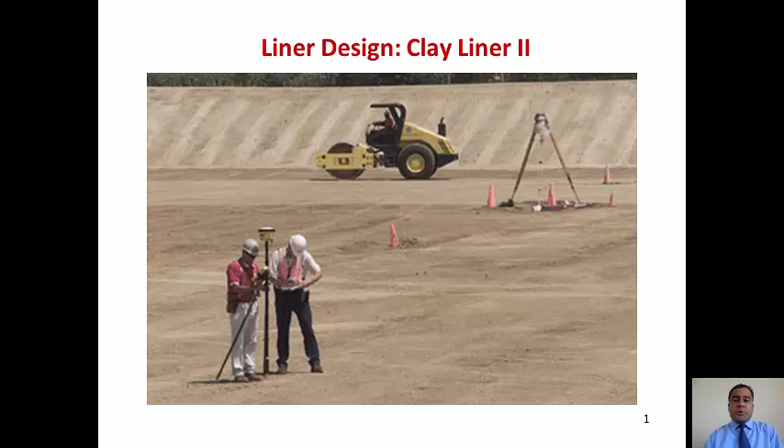Today we will finish the characteristics or properties of a clay liner. First we'll talk about the factors that affect hydraulic conductivity. Last week we talked about what hydraulic conductivity is, how to measure it, and what the requirements are for liners. Today we'll check what factors control hydraulic conductivity. We'll also talk about measurement of hydraulic conductivity in lab and in field, and in the third quarter we'll talk about compaction characteristics.

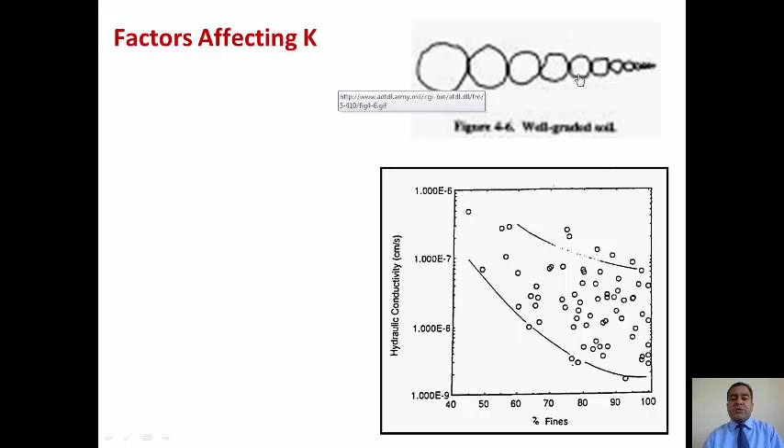Let's begin with the factors that affect hydraulic conductivity. Mostly soil is called well graded if it has different size particles in it. We measure that based on the coefficient of uniformity and coefficient of curvature that we dealt with before. The hydraulic conductivity is less if we have more fine-grained particles in it, and that's obvious because if we have coarse-grained particles, the voids created by those coarse-grained particles are pretty big. If we have fine-grained soil, it will go inside those voids to increase density and reduce the pore space, and that reduces the hydraulic conductivity.

Here's an example. The hydraulic conductivity that we need is 10 to the power negative 7 centimeter per second, that we repeatedly talked about, and these are the data they got. You can see the trend: higher the percentage of fine, that is percentage of silt and clay, percentage of soil finer than number 200 sieve or 75 micrometers, the lower the hydraulic conductivity. If the percentage of fine is more than 95%, it gets almost constant. But with increase in percentage of fine, hydraulic conductivity decreases, even showing almost a two-order decrease.

As I mentioned, well-graded soil definitely has lower hydraulic conductivity if other parameters are the same. When we add fines, that reduces hydraulic conductivity by several orders. For example, by changing the percentage of fine from 50% to 95%, or 90%, it reduced hydraulic conductivity by almost 2 log cycles. The reason I brought this up is sometimes in the field you have soil you don't want to throw away. If you separate the soils based on gradation or particle size, and then calculate the amount of fine required to make 20%, 50%, 60%, or 70% fine depending on what's needed, and add that fine—sand plus silt, clay plus silt—that helps reduce the hydraulic conductivity.

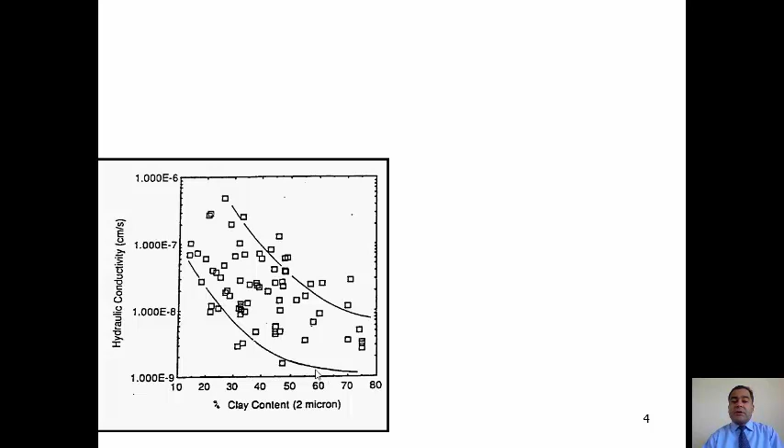Most of the time, what happens is the soil we get in the field doesn't qualify for a compacted clay liner, because we have enough sand in it but not enough clay, and that causes a significantly high hydraulic conductivity value. So what we do is purchase commercially sold clay, highly expansive clay—we talked about bentonite before, when we discussed clay minerals.

So bentonite is a type of commercially available soil that we can buy in the market at a relatively cheap price, but it has a significant high percentage of montmorillonite, sometimes over 90%. The sodium bentonite I have in the lab has more than 90% montmorillonite in it. So bentonite is a soil, a highly expansive soil, with a significant amount of montmorillonite.

Okay, now you see the trend here. For silt and clay, that's fine, we're talking about 50% to 90%. For clay to get the same reduction in hydraulic conductivity from 10 to the power negative 7 to 10 to the power negative 9, you need less than 60% clay in it. But for our purpose, less than 10 to the power negative 7 centimeter per second, if you're going with the lower bound, you need about 15% clay. Upper bound, you need about 45% clay.

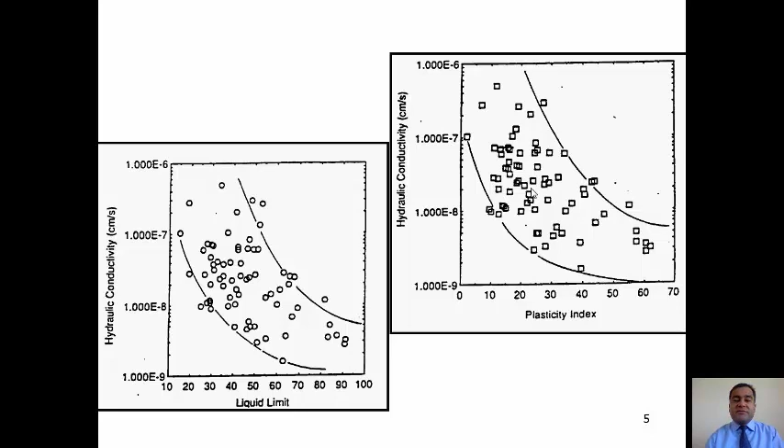So the important fact for us is to get the required hydraulic conductivity. If you see the example here, the hydraulic conductivity can be achieved at a plasticity index ranging from 5 to 32 or 33. So that is the range. But this is just one statistical dataset that someone published, there are tons of data we need to go through to make the guideline.

For that reason, whenever you see a guideline, it is always conservative, and you will see what the required plasticity index will be. For example, if I simply say the required plasticity index of the soil is 10%, if it is smectitic soil, it will give a hydraulic conductivity lower than 10 to the -7 centimeter per second. But if the soil is dominated by kaolinitic or silty particles, then 10% does not give enough reduction in hydraulic conductivity, that is, 10 to -7 centimeter per second. That is the logic behind the requirement we fix for the plasticity index, plastic limit, or type of soil for compacted clay liner.

Mostly, as I'm repeating, we're focused on a required hydraulic conductivity of 10 to the -7 because we are concerned about the movement of leachate more than anything else. We need clay because clay has lower hydraulic conductivity that reduces the movement of leachate. So if we talk about plasticity index, mostly if it is more than 7 to 10%, typically we can get the low hydraulic conductivity, as shown before.

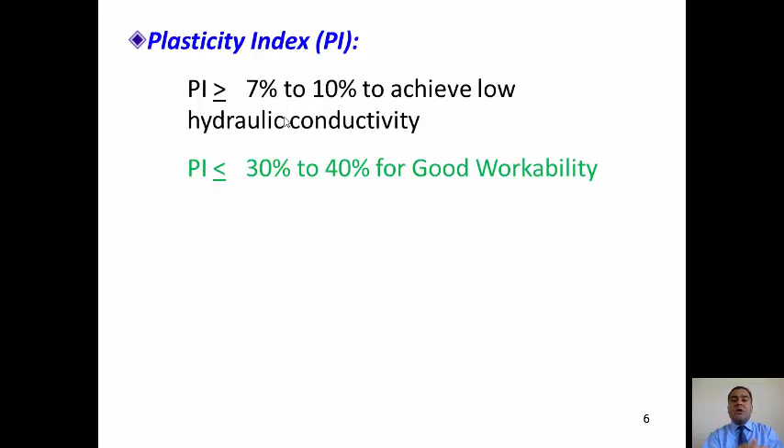So we even prefer that. The problem is, if you have highly plastic soil, then when we compact it in the field, because it's highly plastic, you don't get a fully saturated condition, because we also control the moisture content when we compact. If the soil is highly plastic, the water we add may create clots of particles, so there may be segregation, some clots of particles with a lot of water while other particles remain dry, and when we compact them, the compaction effort may not be uniform.

So one clot of soil we compact may have the required hydraulic conductivity, but the other part that isn't clotted, with less water, may give much higher hydraulic conductivity than the part with enough water. For that reason, it's important to limit the plasticity index also, to reduce clot formation during compaction and heterogeneity in the hydraulic conductivity of the compacted soil specimen. For that reason, we don't want to go much higher in plasticity index, although in a lab situation that may be desirable for lower hydraulic conductivity.

Keep this in mind, this is extremely important - it limits the upper limit of plasticity index for soil used as compacted clay liner. There are ways to deal with that: if we increase the compaction energy or compaction effort, that will break the clots and give more homogeneous hydraulic conductivity, but that is not cost effective.

Good soil liners can be built from soils with very high plasticity index, although construction is more difficult because we need more energy to break the clods. The main reason is that soil with high plasticity index or liquid limit has the disadvantage of high shrinking and swelling, which may cause desiccation cracking.

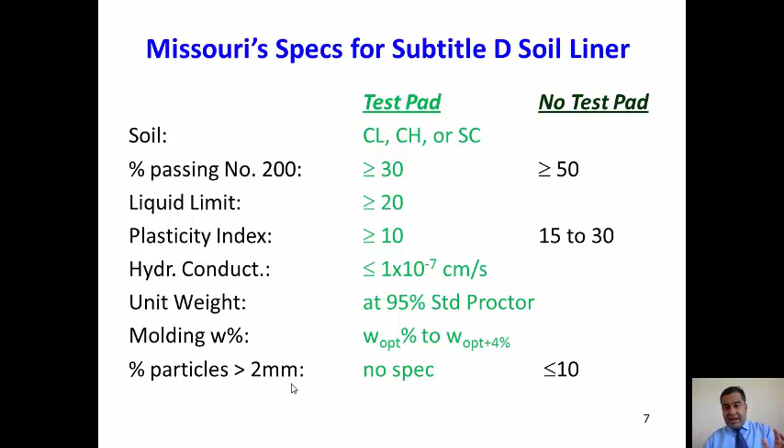So this is the specification for Missouri. It could be different for California. It could be different for different parts of the world.

The other characteristic that controls hydraulic conductivity is the freeze-thaw environment. It is extremely important and plays a huge role in major parts of the U.S. where we have frost depth. For Southern California, for Los Angeles, we don't have frost depth. But if you go to the northern part of the country, like North Dakota or Wyoming, the annual freeze-thaw zone, the depth of the annual freezing zone, is pretty large, sometimes even higher than 5 feet.

So that's the freeze and thaw cycle. In winter, the ground freezes. In summer, the frozen soil melts and thaws, and that will cause a big problem. That freezing and thawing cycle may cause more than 3 orders of magnitude increase in hydraulic conductivity. The main reason is when soil freezes, the volume of the water increases. That way, the void space filled with ice increases because the water becomes ice. So the void space filled with ice, that volume of void space increases. And then when it thaws, it becomes water. For that reason, with different numbers of cycles, the actual volume of the void keeps on increasing.

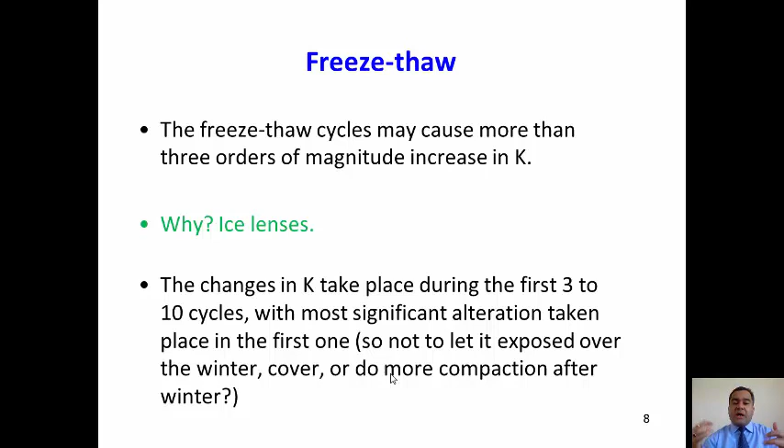So what we do is cover them, and we do more compaction right after the first winter. We know freezing and thawing cannot be controlled, but as soon as one cycle of freezing and thawing is done, we compact again. That way, even though the void space is increasing, compacting reduces the void space, and that way we maintain the hydraulic conductivity. That is one remediation in those areas.

So we talked about compaction. When we compact soil, we take soil in the real field and compact it with compaction devices, or you can take soil in a container, like a steel container, pour the soil in and drop a hammer to compact them. The compaction effort increases. What is the objective of compaction? To increase the density of the soil mostly.

If we add water, that water will help move the particles inside, fill in the voids, reduce the void space, and increase the density. The more water we add, that will lubricate the soil and help it move closer together, which helps increase the density.

But if the amount of water is more than a certain amount needed for that lubricating effect, then adding more water may end up filling the void space, and when we compact, the water may repel the inertia back. Also, water is incompressible, so it takes up void space that has potential to be compacted. Since water is less dense than soil, with the void space taken by water, that starts reducing the density of the soil.

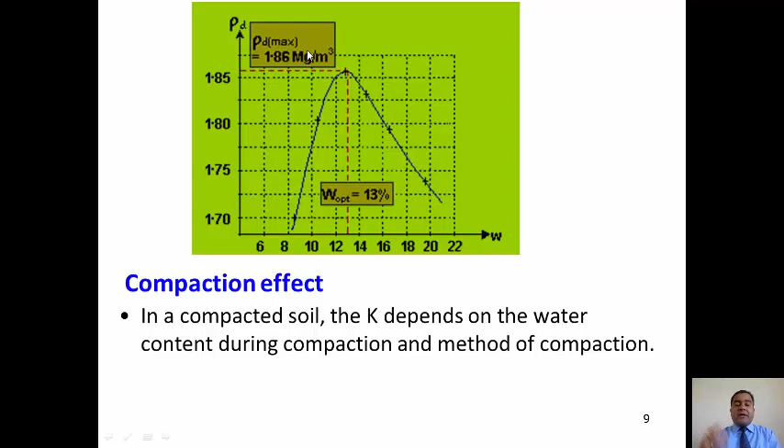Depending on if you increase the amount of inertia, even with less moisture content you can increase the dry density or dry unit weight of the soil - we'll talk about that in a couple of slides. The important thing for us is to know the moisture content that corresponds to the maximum possible dry density for that particular soil and compaction effort.

That corresponding moisture content is called optimum moisture content - the moisture content that gives us maximum dry density or maximum dry unit weight. This figure is the same one I showed you before: higher the molding moisture content, higher the dry unit weight or dry density of the soil. The broken line shows the moisture content that corresponds to maximum dry density, which is optimum moisture content.

Now looking at the hydraulic conductivity of the soil at that moisture content - if you increase the moisture content higher, the pore space fills with water, and even though the density is a little low, hydraulic conductivity decreases. Hydraulic conductivity becomes almost constant at a moisture content somewhat higher than the optimum moisture content. So increasing the moisture content beyond that does not further reduce the hydraulic conductivity.

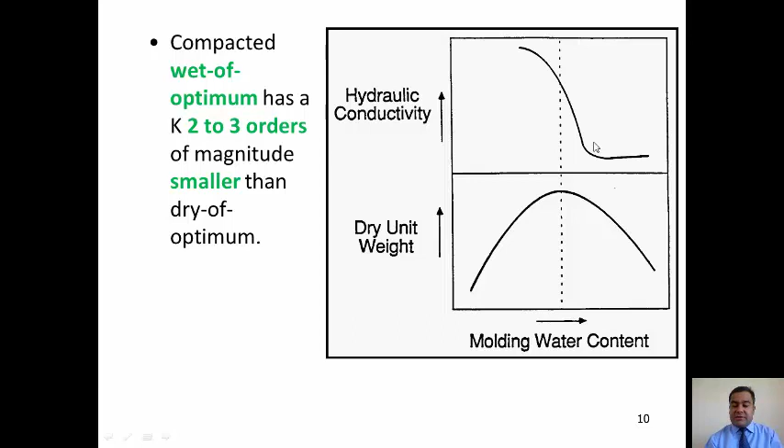So we have to keep that in mind. For that reason, when we make this specification, we always say the field moisture content used to compact the clay liner should be more than the optimum moisture content, or should be on the wetter side of the optimum moisture content, but we don't want to go beyond a certain moisture content. That does not help us in reducing the hydraulic conductivity. We have to keep that in mind.

So the other factor that controls the hydraulic conductivity is how we compact the soil. The clays can be compacted in two ways. One is we lay the soil, let's say a 6-inch thick lift of soil, and then we roll it with a smooth wheel roller or some static compaction on top. That's one way we compact the soil.

The other way to compact the soil is kneading. Static compaction simply puts pressure on top and lets that pressure cause a reduction in volume to increase density. The other is kneading action. When you're adding water to clays, more kneading you do, the more distribution of water you get at one point.

At the same time, if you have a device with that kneading action, it is mixing the soil, compacting at this point and at that point simultaneously. That is called kneading action. You need a projection for that. That way you apply similar pressure at the bottom and at the top. But with static pressure, you have more pressure at the top and less at the bottom. So kneading action makes sure the soil is uniformly compacted in all areas.

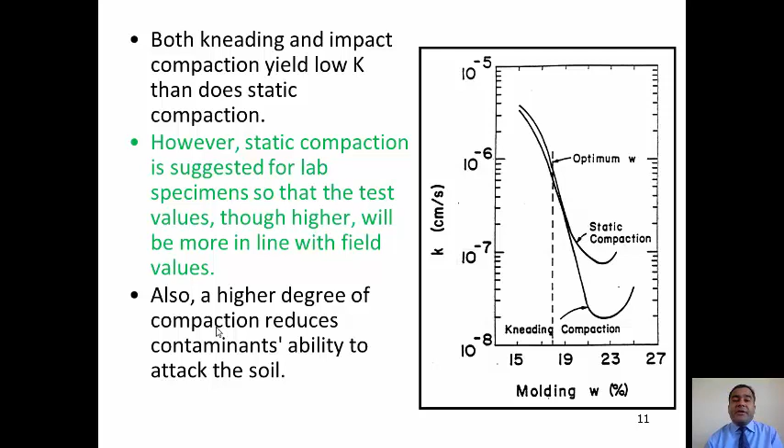That reduces the possible change in property of the soil due to contamination, due to the chemical attack on the minerals in the compacted clay liner. So this is important - one thing to keep in mind is hydraulic conductivity.

Compacted clay liners are actually not fully saturated. When we operate them in the field, they are not fully saturated. They are compacted, meaning degree of saturation is less than 100%. We'll talk about that - that means you have air void and water void.

The conductivity of water is called hydraulic conductivity. Conductivity of air is not called hydraulic conductivity - it's called the coefficient of permeability of air, or coefficient of air permeability.

If we put the soil sample in the lab, saturate it, and measure the hydraulic conductivity, that is called hydraulic conductivity for saturated phase. If the degree of saturation is 100%, the hydraulic conductivity divided by KRA or KRW, relative hydraulic conductivity, that is hydraulic conductivity of the soil divided by hydraulic conductivity of the saturated soil. Since it's completely saturated, that ratio will be 1, because mostly when we run the hydraulic conductivity test, we saturate the sample and measure the hydraulic conductivity of the saturated soil specimen.

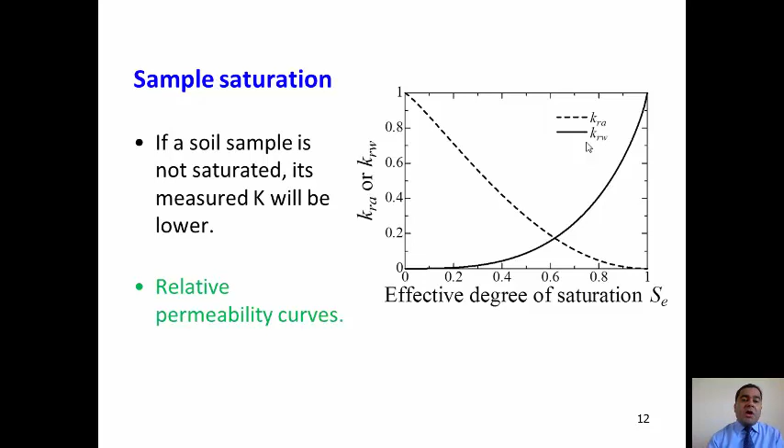And then we always check that in the relative permeability curve like that. We check the ratio between the hydraulic conductivity of the soil. Rw is hydraulic conductivity, Ra is the air conductivity, air permeability. So we always need to use this type of chart for different types of soil.

The other thing controlling the hydraulic conductivity of the soil is the hydraulic gradient itself. What we saw was EPA requires the height of the leachate in the landfill to be less than 1 foot, which we talk about frequently. Let's say the thickness of the clay liner is 1 foot, and the height of the leachate is 1 foot.

That gives us the hydraulic gradient equal to head difference divided by the length it traveled. If the head difference is pretty high, the hydraulic gradient will be high. If the thickness of the liner is 1 foot and the height of the leachate is 1 foot, then using the equation H plus D over D, that's total 2 foot over 1 foot, so the hydraulic gradient is 2.

Let's say you have a liner 3 feet thick, and the leachate is 0.5 foot tall. Then it will be 3.5 over 3, which is much closer to 1. So we always try to reduce the hydraulic gradient and put it closer to 1.

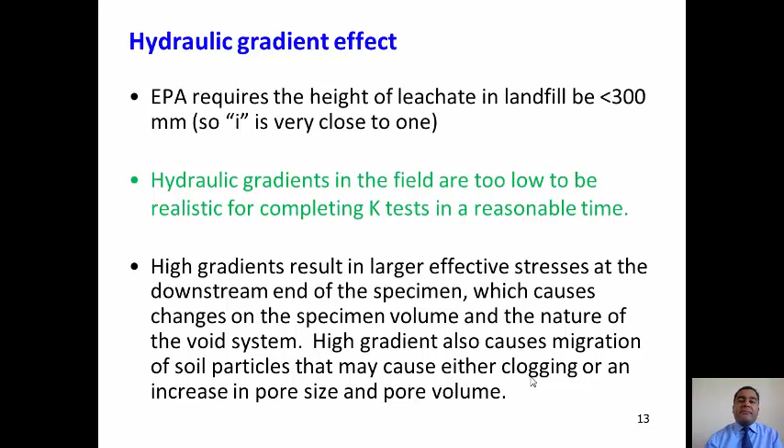If that suspended particle is flushed out, then the pore space increases. That's important to note, and that will increase the void ratio of the soil. And consolidation stress is the pressure we are giving to the soil.

At some point, when the compacted clay liner is completely saturated—first we put the compacted clay liner, and then at one point you have a huge amount of leachate on top of it—a portion of the compacted clay liner might be completely saturated. As we keep putting garbage on top of that, we are increasing pressure on top of it, and that increase in pressure will squeeze and compress the soil.

Then the water gets pressurized, and that pressurized water starts leaking out, so the water drains out. That phenomenon is called consolidation. Water drains out and that reduces the volume of void, reducing the void ratio. The phenomenon of draining pressurized water or fluid out from the void space to reduce the void ratio and the volume of the soil is called consolidation.

So higher the consolidation, how do you get consolidation stress? The more garbage you put in, the more it keeps increasing the consolidation stress, which is the pressure pushing on the compacted clay liner. Higher the consolidation stress, lower the K, because that reduces the void ratio and increases the density.

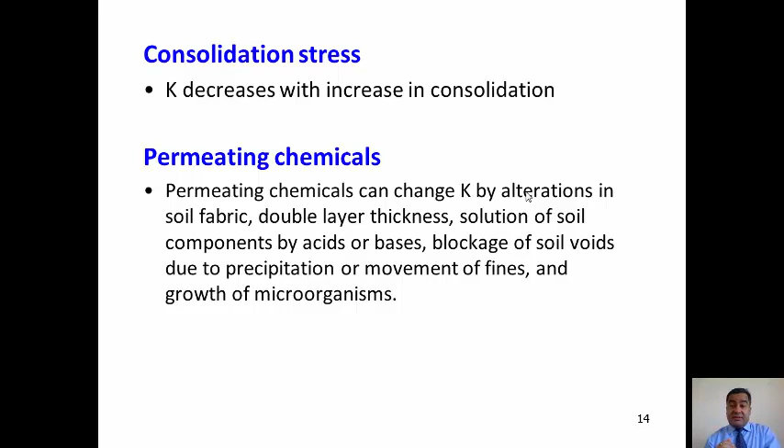But if that thickness decreases, then the attraction between one plate and the other increases. That means there is a possibility that one soil plate will merge with the other pretty easily, because they have a huge attractive force, and that way the particle shape changes. Once the particle shape and fabric change, that will change the hydraulic conductivity.

So we have to be very careful. We have to think about what type of chemical we are getting from the leachate, and what will be the reaction of those chemicals — if you have acids or bases — with the soil we are using for the compacted clay liner.

Sometimes what happens is some chemicals just produce precipitation. Like if you have lime or calcium, that can produce calcite precipitation. Once you have calcite precipitation, that becomes solid and takes up the pore space, blocking the void space, and that will block the movement of fines.

The other possibility is movement of fines and movement of water, and sometimes in the long run, depending on what type of chemical and biological characteristics you have in that soil, there is a possibility that you may develop microorganisms. If a microorganism develops, it takes the space of the void, so void ratio reduces. But if that microorganism dies off or something, the void ratio returns to the original or even becomes bigger. We have to keep all those things in mind.

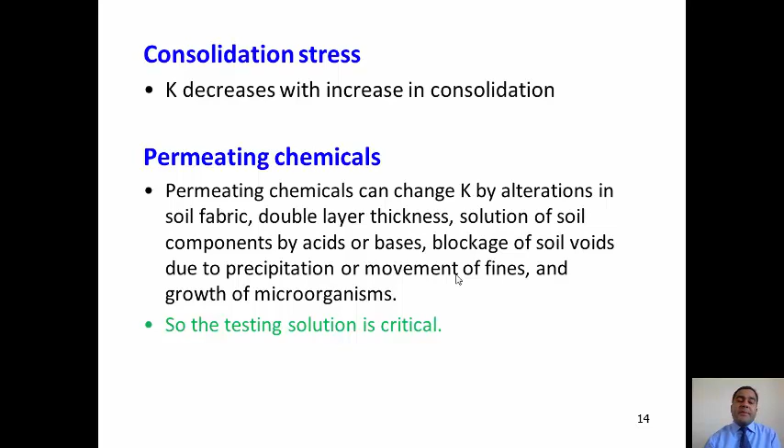So it's always important for us to run all these tests, even in the lab, using potentially contaminated water — mostly artificially prepared contaminated water. We'll talk about that in a couple of weeks, how we prepare that type of soil solution. But it's always good to test the water with different chemical components and see how those components change the hydraulic conductivity of the soil we'll be using.

The important variables we need to consider in testing hydraulic conductivity in the lab are as follows. You have to make sure that the lab sample may not be the same as the field sample, so we have to make the lab sample as close as possible to the field sample.

Field compaction is done by the sheep's foot roller, or it could be done by the smooth foot roller, any type of roller. Lab compaction may be done using static pressure, or by dropping the Proctor hammer. We have to keep all these things in mind when we set up the lab environment, so we always try to make the lab sample as close as possible to the field sample.

Degree of water saturation is extremely important. We talked about that - higher the degree of saturation, higher the hydraulic conductivity. For that reason, to be on the safer side, if you run all tests at 100% degree of saturation, that'll give you the maximum possible hydraulic conductivity, and we are on the better, more conservative side of the design.

Stress condition - we have to keep that in mind. What is the stress we are putting on the sample to simulate the field situation? Because the effective stress in the field ranges from day one to the end of closing. Effective stress ranges significantly from the starting to the end of the landfill site or the cell.

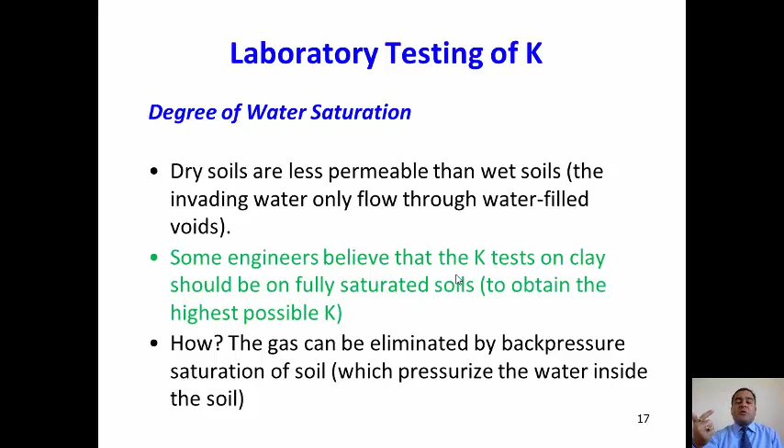Okay, so if you see the effect of confining pressure on the hydraulic conductivity, we're talking about clay. When clays are dry they shrink, and when they are wet they expand. So when they have that expansion and shrinkage behavior, negative pressure develops, and the clays crack.

Whenever you have some pulling effect, when it is shrinking, then one part of the soil is pulling against the other. So when they are trying to separate from each other, tension is created. That tension, or suction, the soil cannot take, so the soil cracks immediately after it develops tension.

When you have that tension much below the ground, the tension is balanced by the effective vertical stress from the total vertical stress, so you don't get negative effective stress. But on the surface of the soil, there isn't much surface load, so the soil cracks. These types of cracks are called desiccation cracking.

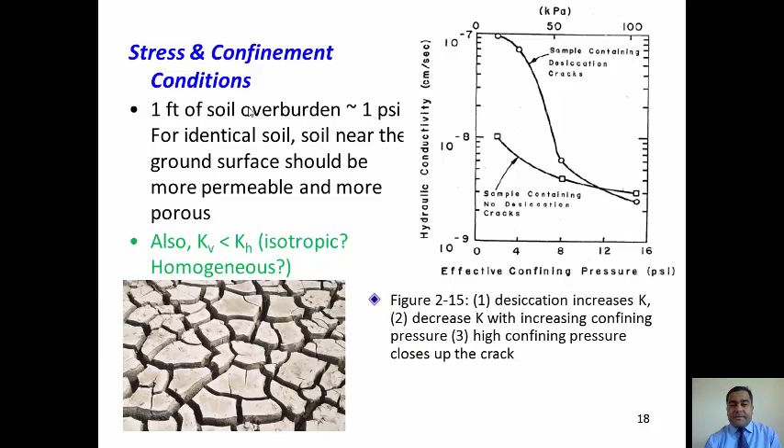All these factors we have to keep in mind when we design the landfill site. For that reason, the confining stress used in the lab test should be of the same magnitude as that in the field, because the magnitude of confining stress changes with overburden pressure, and overburden pressure changes with time. So rather than fixing on one value, we may want to see the ranges.

For example, oil reservoir cores are much further below the ground. When you take them out, overburden pressure was thousands of psi when they were under the ground. When you take them out now, there's no overburden pressure, so the soil expands. These are important things to keep in mind when we design lab tests and even when we design landfill sites.

The bottom of the liner will always receive additional compaction from the waste and final cover, as we talked before. On the other hand, none of these things exist for the top cover. So the bottom gets more confining pressure, more overburden pressure compared to the cover. The liner gets more overburden pressure than the cover, because the only thing you get on top of the cover is topsoil.

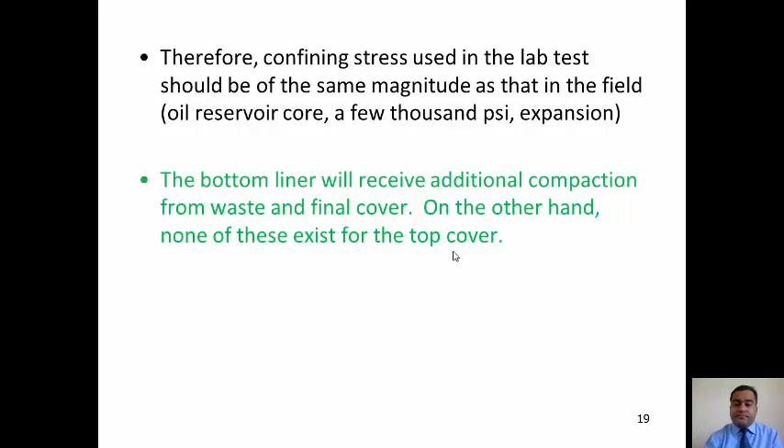In addition, the cover is the top layer - after you're done with your landfill, you cover that with a layer called the cap or cover. So the cover is subjected to many environmental forces. Now you have erosion coming - if you have huge rainfall, that may cause erosion. In dry conditions, you have more desiccation cracking problems in the cover compared to the liner, because mostly the top portion of the liner is filled with leachate anyway, so it's getting saturated with leachate. But with the cover, depending on the wet season it gets a little wetter, but mostly temperature changes cause desiccation cracking on the cover.

So it is extremely hard to design and implement a final cover with a hydraulic conductivity lower than that of the bottom liner, because in reality you may come up with that, but in practice, all those environmental consequences may cause an increase in hydraulic conductivity in the long run.

So how do we run the hydraulic conductivity test? We just compact the soil in a mold, called a rigid wall permeameter or container. We compact the soil inside at a certain pressure, we lock them, and then we flow water. If you have time, come to my lab and see - I have different types of permeameters you can see. Mostly we use this one.

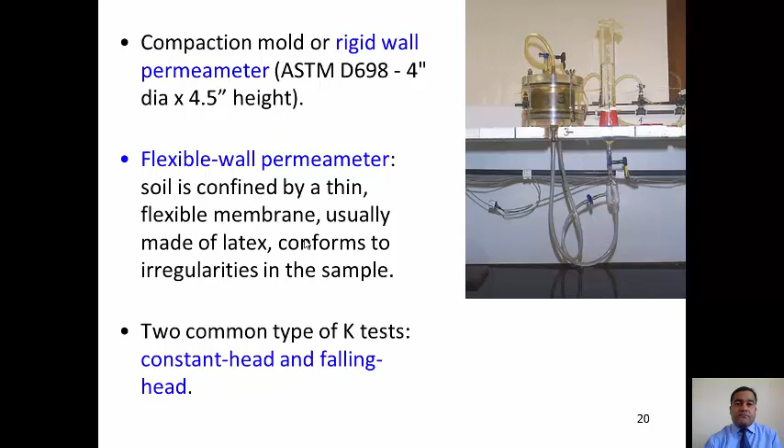We also do field testing, which is much better than lab testing because it gives you the field situation, but it is much more expensive. Field hydraulic conductivity measurement is more realistic than the lab test because the mass of soil is huge, and the phenomena is two-dimensional or even three-dimensional compared to one-dimensional in the lab.

One type of field testing is the borehole test. What we do is drill a hole, fill the hole with water, and measure the rate, because once you fill it with water, the water keeps on percolating down into the ground. So we keep on filling that hole.

The amount of water required to fill the hole divided by the time period gives you the discharge, and based on that discharge, we can easily calculate the hydraulic conductivity of the soil. That's one way we measure field hydraulic conductivity in the borehole test.

The other method is porous probes. These are similar, but what we do is take the probes, which are like a cylinder filled mostly with porous stones, porous materials made of porous stones. We insert them, connect them with a tube, and supply water through the tube.

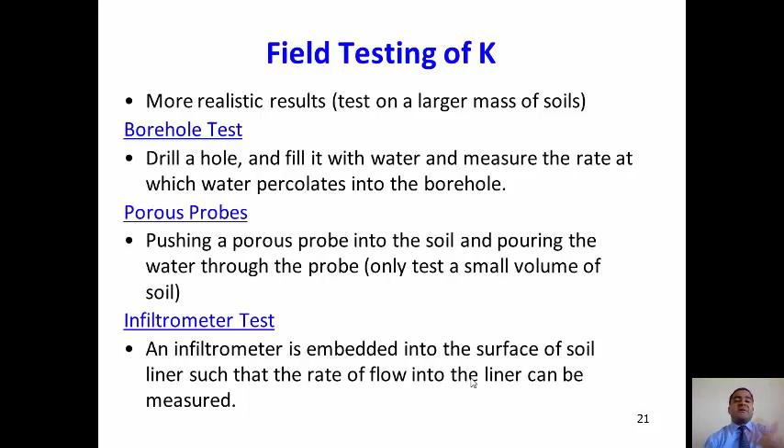These types of devices are called infiltrometers, and there are different types: double ring, single ring, sealed. We'll talk about that. Let's say this is a liner, the hatched one is a liner.

In the open single ring type of infiltrometer, what we do is fill the liner up to a certain point with water, and then measure the head going down, the height of the water going down. Using the Darcy's equation formula we saw before, you can easily estimate the hydraulic conductivity of this liner system. The problem with this is it's so big that the water evaporates.

You have no idea whether the reduction in the height of the water's surface here is due to evaporation or due to percolation. So to reduce that evaporation effect, what we do is we seal them - single liner, but sealed. And if sealing, you bury it underwater a little bit, but mostly what we do is make this tube from where we're supplying water smaller. That way evaporation becomes less, and at the same time sensitivity of the amount of water going inside increases.

So these are single ring liners, but in the field, double ring liners are more popular. What we do is put a bigger liner, large size infiltrometer, in the container first, and then put a smaller size one inside that. The bigger one could be rectangular or square, the smaller one could be rectangular, but mostly we prefer the circular one - we put circular inside, then pour water inside.

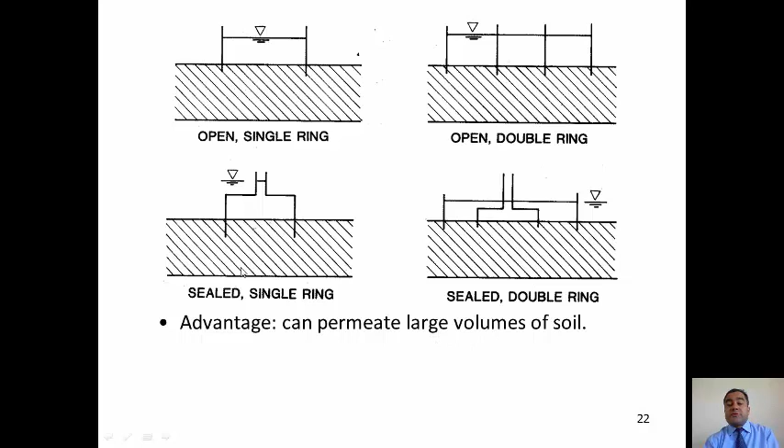The advantage of these infiltrometers is they can permeate a large volume of soil, because we're putting that in the soil directly. There are two forms: one is open, the other is sealed. These two are like sealed ones - we're sealing the majority portion. Still, we have to keep it open like a piezometer, just to maintain atmospheric pressure. The open rings are less desirable, mostly because of the evaporation.

For example, if the hydraulic conductivity is 10 to the -7 centimeters per second, it's hard to separate a drop of 0.002 inches per day from evaporation. If you're getting any evaporation, how do you separate whether the drop in water level was from percolation or infiltration, or from evaporation? For that reason, sealed liners are always preferable.

So you want to see the picture of that - it's like that. We maintain the flow of water here, you see - we fill outside with water, we fill inside with water. We have two ways: either we measure the volume of water going in to maintain the same head, or sometimes we simply measure the height of the water inside. These are the sealed ones.

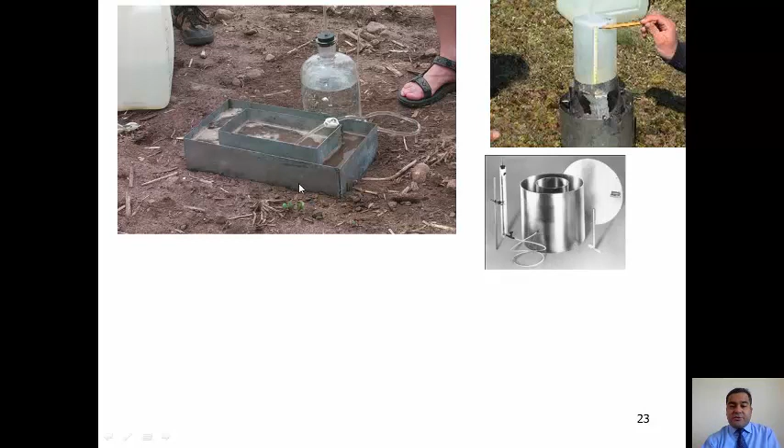And these are the double liner types - you have outside circular double liner, you have rectangular double liner type infiltrometers. So, single ring or double ring: single ring is less favorable because it allows lateral flow beneath the ring, as I told you before, and it's susceptible to temperature variation.

But with a double ring, the one inside is less susceptible to temperature variation because the outer ring is protecting it. Sealed double rings, because of all these advantages, are the most successful and preferable, although they are more expensive - I'd say the most expensive. The common size is a 12 foot by 12 foot outer ring, and 5 foot diameter inner ring.

So this is a schematic of the infiltrometers. Like you have soil, this is the soil, and we put bentonite grout just to make sure the flow is vertical down, one-dimensional. On top of that we put loose sand in it. So this is the wetting front of the liner, from where we're supplying water in.

So water keeps on percolating down from the liner, right? As it moves down, the wetting front means the separation between the saturated and the unsaturated zone. In other words, the wetting front is the front of the seepage water. Okay, that's the wetting front.

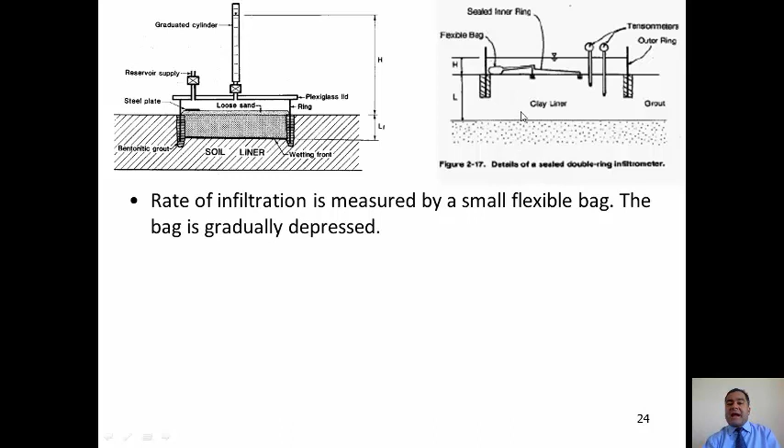So the rate of infiltration in these types of infiltrometers is measured by a small flexible bag like that. The bag is gradually depressed in the liner as the water moves down, and the outer ring forces the infiltration from the inner ring to be more or less one-dimensional, because that's the objective of the outer ring. And covering the inner ring with water mostly insulates it substantially from temperature change. Okay, so this is the objective.

So, we talked about that. And the bag you have in this double ring infiltrometer, or sealed infiltrometer, serves to stabilize the pressure between the inner and the outer rings. Otherwise there will be flow. If there is a pressure difference between inner and outer, there is a possibility that flow from the outer will go into the inner, or vice versa.

And the other device we use in the field tests is called lysimeters. What we do is leave some pipes and devices from where we can collect the leachate. So when we do construction of these clay liners, we leave some pipes in, so we can collect the leachate water as it gets out from the liner system. Then we measure the water that comes out from the bottom of the liner as the pressure increases, as the water flows, as the water penetrates. So it is a direct measurement. If we're talking about the field test, sometimes you can even do that in a real landfill, or for a field situation where you're making a test pad.

When you are making a test pad, you put all those pipes in while compacting for the test pad, then supply water from outside and see how much water is actually leaking through. So it's a direct measurement, and it is the most accurate one.

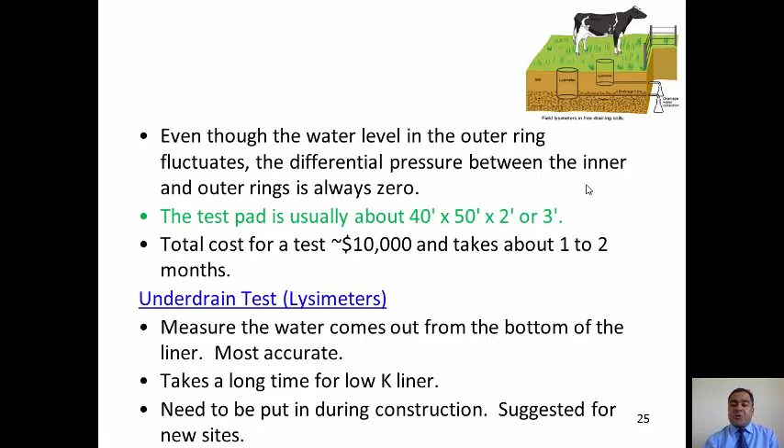But it takes a long time for the water to flow down, because the hydraulic conductivity of the liner is pretty low, and it needs to be put in during construction. So even for the test pad during construction, if you're talking about the real flow of leachate, we may want to put that during construction in new sites.

Hydraulic gradient is important. So the limitations of the field tests are: first, we measure the infiltration rate instead of the direct K value. In lab tests we directly measure the hydraulic conductivity, but here we indirectly calculate hydraulic conductivity based on the infiltration rate.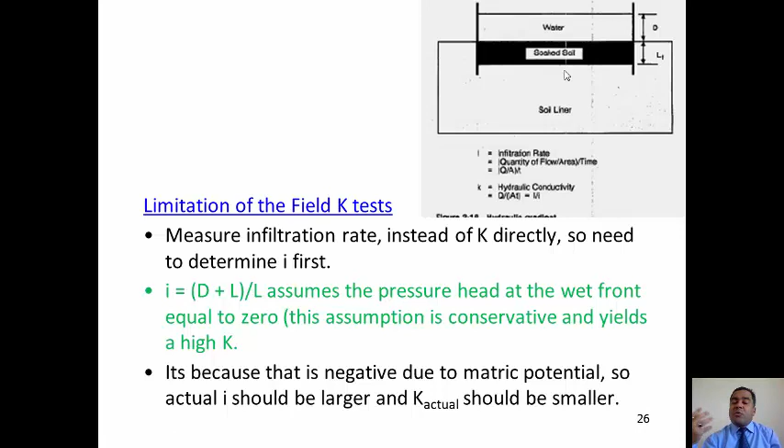The actual hydraulic gradient should be larger, because the hydraulic conductivity difference is based on pressure head difference. Since you have a negative head difference, the actual hydraulic conductivity with suction will be the difference in pressure from this point to this point, where we assume zero pressure, but in reality it is not zero - it has negative pressure. So actual hydraulic conductivity depends on the amount of suction you get here.

Because of effective stress, the higher the effective stress, the higher the difference in pressure from top to bottom. The higher the effective stress, the lower the hydraulic conductivity, because the higher the pressure, the higher the overburden stress, which leads to higher consolidation or compaction in the soil sample. That reduces the void ratio - lower void ratio, lower hydraulic conductivity.

So overburden stress is essentially 0 in the field - in fact, it's hard to study the effect of stress in the field. For that reason, we use the lab data to adjust the field data, assuming they have the same trend.

So what we do is, in the field, there is no overburden pressure, because we are running all those tests before we dump the garbage on top, before we complete the landfill cell. For that reason, you cannot increase the overburden pressure in the field.

You can see the effect of overburden pressure to reduce the void ratio and to reduce the hydraulic conductivity in the lab. In the lab, what we can do is increase the overburden pressure by increasing the pressure in that soil sample itself, so we can consolidate it at different overburden pressures and run the hydraulic conductivity test on that.

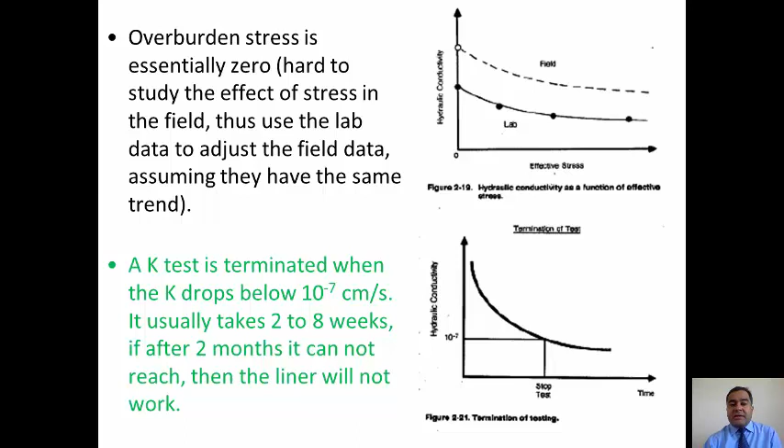If after 2 months we cannot get our required hydraulic conductivity, then the liner doesn't work, so we have to keep that in mind. Hydraulic conductivity is high in the beginning—this is how we do the field tests. With time, hydraulic conductivity decreases, and we keep on testing them.

So the difference between field and lab tests is this. It's preferable to do both tests. One reason is you want to see the effect of overburden pressure. Also, labs are less expensive than field tests, and you can do all types of scenarios in the lab that you cannot do in the field.

You can do many more samples in the lab. Even if you mess up the test for one sample, you can repeat it on another. We can simulate certain conditions like back pressure to get rid of air voids or achieve complete saturation, or overburden pressure—because partial saturation is bad, since if the soil has a degree of saturation less than 100%, that'll give you lower hydraulic conductivity, which is disastrous.

We can also use actual waste, similar to the real waste, in the lab—we don't have that flexibility in the field. So if the liner is free of defects, the lab and field hydraulic conductivity should be the same in reality. If not, then the way we compact and prepare the sample in the lab might be different than the way we compact the sample in the field.

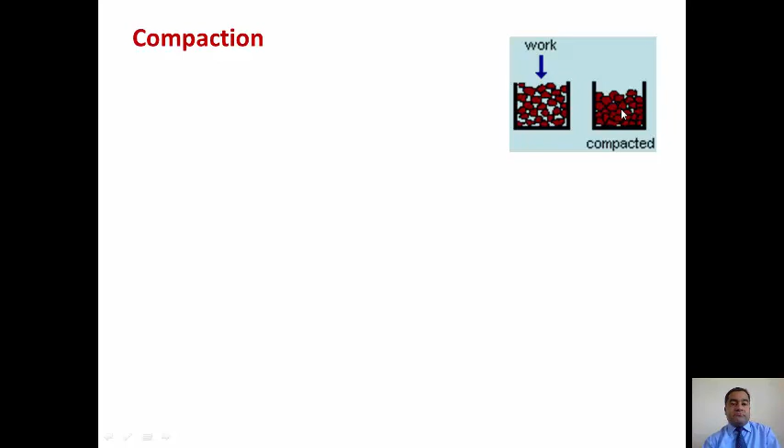In geotechnical engineering or civil engineering design projects, soils are compacted to improve the shear strength, because compaction increases the density, and that increases the shear strength.

Compaction also reduces the compressibility, because when we compact, we move particles from one place to another, and we've already changed the volume of the soil. That way, further increase in stress will reduce the compressibility or settlement.

We also reduce the permeability. This is important for compacted clay liners. Because the void space reduces, the void ratio reduces, the density increases, the hydraulic conductivity reduces, and the permeability reduces.

Also, because we reduce the void space, the chances of water going inside to fill the voids is reduced. The volume of water going inside and filling the void space is less, which reduces the shrink and swell potential of the soil.

It also reduces the liquefaction potential, because liquefaction mostly occurs in loose sand. It's important at one point, but not that critical at this point. When an earthquake load comes, it pushes the saturated sand and pushes water. The water provides upward pressure, called pore water pressure, which reduces the effective stress and converts the soil into fluid. That phenomena, in terms of behavior, is called liquefaction.

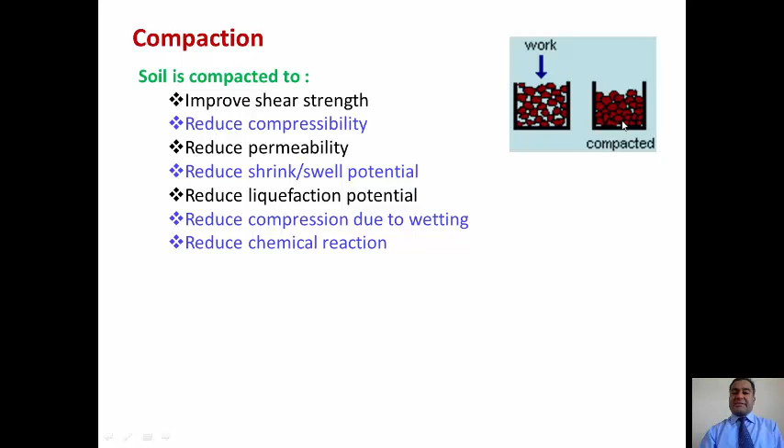The behavior of the soil during and after compaction depends on the type of soil, whether it's fine grained versus coarse grained. So the behavior you need for a compacted clay liner is different than the behavior you need for a drainage layer or filter layer.

The behavior of the soil during compaction also depends on the compaction moisture content—we'll talk about that in detail—and it also depends on the method of compaction. As I told you, if we're doing kneading compaction, the behavior is different than when we do static compaction. It also depends on whatever equipment we are using.

The goal for compaction in any construction project is different. Even for building construction, the goal is different than the goal for compaction in a landfill liner. In building construction, we want to increase the density, increase the shear strength, and reduce the compressibility. For a liner, we are trying to reduce the void ratio to reduce the hydraulic conductivity. We have to keep that in mind, because we're not too concerned with the bearing capacity of the liner.

So compaction in a clay liner is mainly to reduce the hydraulic conductivity. A high permeable zone may not be of great concern for building construction, because higher permeability means quicker pore water pressure reduction, which is better for a building. But lower permeability is much better in the landfill liner. So that's a big difference.

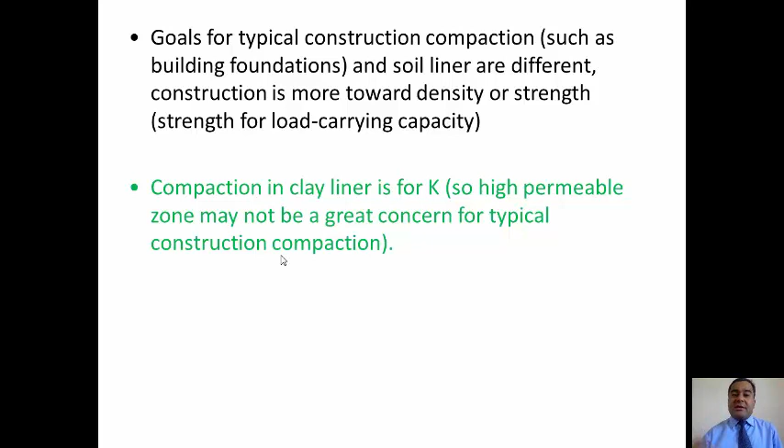So there are different variables for compaction. One thing that controls the compaction characteristics is the soil water content—I may end up saying WC from now on—and the type of compaction you are doing, whether kneading compaction versus static compaction.

The compaction effort or behavior of the soil depends on compaction effort also. More energy, more compaction, more different behavior compared to less energy. And size of the clod. Bigger the size of the clod, for the same amount of energy, maybe the hydraulic conductivity might be different than for the smaller clod size.

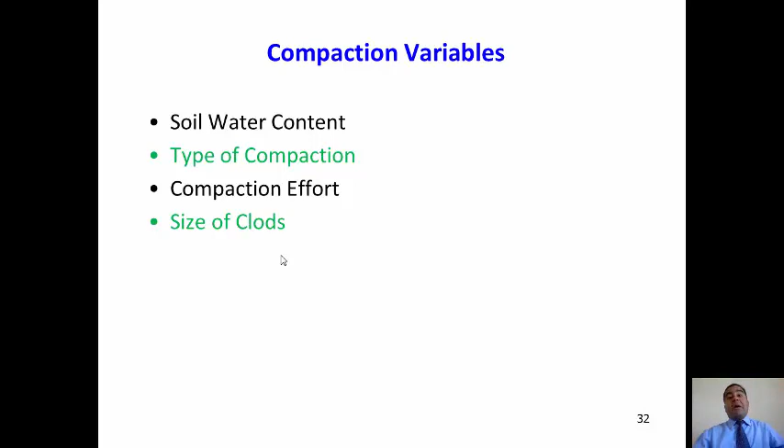Clod size means, when you add water in clays, the clay becomes separated into clods, like a mound type of thing. Mound is big scale, clod is small scale.

It also depends on the bonding between different lifts, because in real practice, if you're making a 3 or 4 foot thick clay liner, you are not putting all 3 or 4 foot thick clay there. We put clay in every 6 or 9 inch lift, then we spread the clay, spread water in there, and then we compact, right?

The bonding between the previous layer and the new layer depends on how much compaction you are applying. So if that bonding is weak and there is a crack in between, there's a possibility that those places will create non-homogeneous or heterogeneous hydraulic conductivity in the soil, and that may be bad. If it is continuous, that might be the source of leakage.

It's important, so it also depends on compaction equipment. Kneading action versus static pressure action depends on what type of compaction equipment you are using. We'll talk about that. It also depends on how much effort we're putting into desiccation prevention, because as I told you, desiccation is disastrous. That will make the soil crack, and those cracks are the sources of a high permeability zone. It is extremely important.

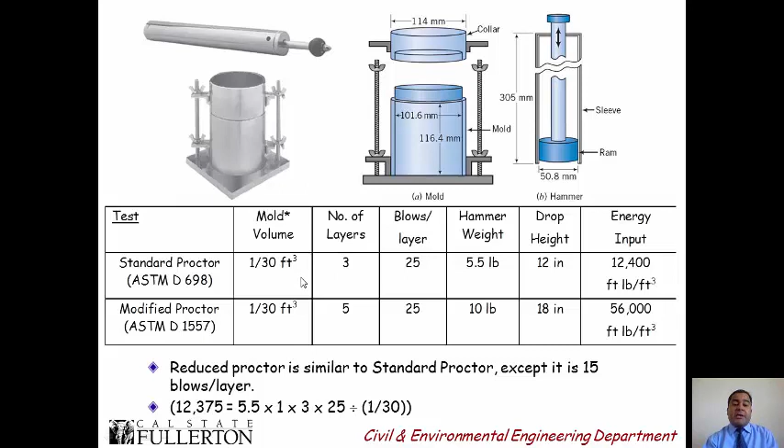So mostly we compact the soil with required compaction effort, whether it's reduced, modified or standard compaction, and then measure the weight of the moist soil mass, measure the volume of the soil mass, typically 1/30 cubic foot for the standard device, and take the representative soil from the top, bottom and middle and put that into the oven to get the moisture content, and add more water into the soil.

Take the new soil, as I mentioned, add more water and repeat the process again. Typically we do 4 or 5 tests. I don't worry about 4 or 5, my students may even go 6 or 7, because their first assumed moisture content is so low that the dry density doesn't go down. So I prefer everyone to have at least 3 points after you get the maximum dry density. Doing more tests is always good.

Unit weight is the total weight of the compacted soil you have over the volume, that is 1/30. Moisture content is the weight of water that you evaporated after putting the soil in the oven for 24 hours, over the weight of the dry soil, multiplied by 100, will give you the moisture content.

Dry unit weight is the bulk unit weight that you got from the compacted soil divided by 1 plus moisture content in fraction. Don't put it in percentage. That will give you dry unit weight.

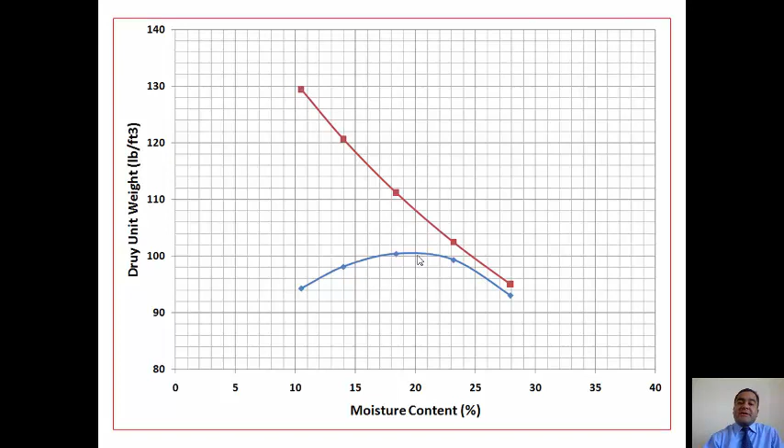Okay, so this is the way how we plot the data, represent the soil test data to give maximum dry density and optimum moisture content of the soil. This is called the zero air void line, and this is called the Proctor compaction curve, where W of 20% is optimum moisture content for this soil, and gamma D of, let's say, 102 pound per cubic foot is the maximum dry density of this particular soil. This is the way how we represent the lab test samples.

Compaction of the fine grained soil is done - you see, if you look at different compaction efforts, higher the compaction effort, the higher the dry density, and lower the optimum moisture content. Keep that in mind. So like modified Proctor, you use more energy, you get...

Let's go with the reduced Proctor, that is 15 number of blows - less energy, you get maximum dry density of this much value with this moisture content. If you increase the compaction effort to standard Proctor, you increase the maximum dry density, reduce the optimum moisture content. If you increase to modified Proctor energy, you increase the maximum dry density, reduce the optimum moisture content.

So there is a possibility that in the field, whatever amount of energy you are using in the field, that should simulate the lab. That's one thing, but it's not always good to have more energy, because there is a relationship between the moisture content and the hydraulic conductivity. For us, more important is hydraulic conductivity as opposed to the strength increase. We'll go into detail on that.

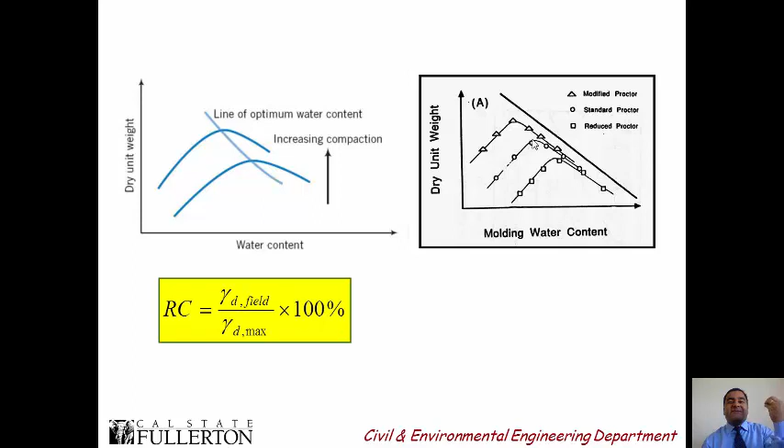The meaning of relative compaction is gamma D field, the field dry density or unit weight, over dry unit weight, the maximum dry unit weight you got from the laboratory test, for that standard or modified depending on whatever compaction effort you are using.

So I need 95% relative compaction, meaning in that example you have 102 pound per cubic foot of maximum dry density. So in the field, if the dry density in the field is less than 0.95 times 102 pound per cubic foot, then we don't accept that. Then they need to apply more compaction energy or do something to increase the dry density or dry unit weight to the required level.

So relative compaction is different than relative density. Relative compaction is field dry density of the compacted field over maximum dry density or unit weight. It is synonymous, because density, if you multiply density with gravity, that will give you unit weight, right? So field unit weight divided by maximum dry unit weight of that particular soil in the lab.

And typically the relative compaction in the field to be accepted should be more than 90%, depending on the situation. Some projects consider 90%, some projects consider 95%, depending on the specification.

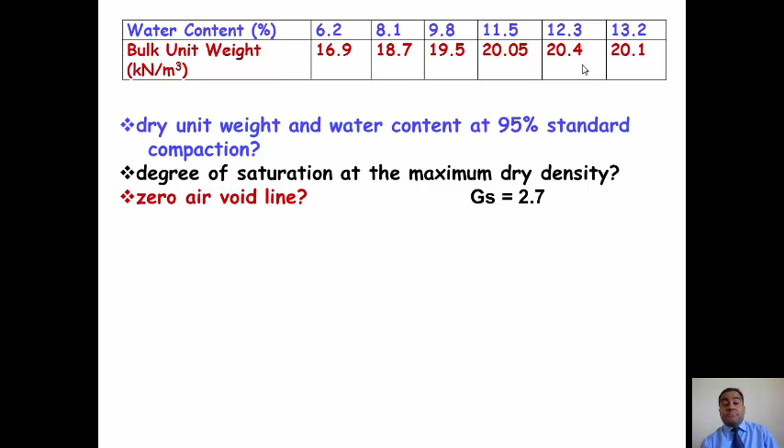So specific gravity of that soil is 2.7. Now you have everything to start with. Make an Excel spreadsheet or table where first you put moisture content 6.2, and gamma is 16.9. If you recall the equation I gave you, gamma D, the dry unit weight, is bulk unit weight divided by 1 plus W. So 16.9 over 1 plus 0.062, or 1 plus 6.2 over 100, will give me 15.79.

The zero-air-void line uses the same moisture content, with specific gravity given. If you plug into the equation, W is equal to 0.062, or 6.2 over 100, and G sub S is equal to 2.7. That will give you gamma D zero-air-void of 22.7. I didn't bring that equation in detail here, but it's like that: 2.7 multiplied by 9.81 kilonewton per meter cube. Gamma W is either 62.4 pound per cubic foot or 9.81 kilonewton per meter cube, over 1 plus 2.7 multiplied by 6.2 over 100, will give you 22.7 kilonewton per meter cube.

Do the same thing for 8.1% moisture content. So 18.7 over 1 plus 8.1 over 100 will give me 17.3, and exactly the same way you get gamma D for the zero-air-void line. That way you complete all those things. So what you have now is moisture content, dry unit weight, and the dry unit weight in case there is no air void in it, or zero-air-void situation.

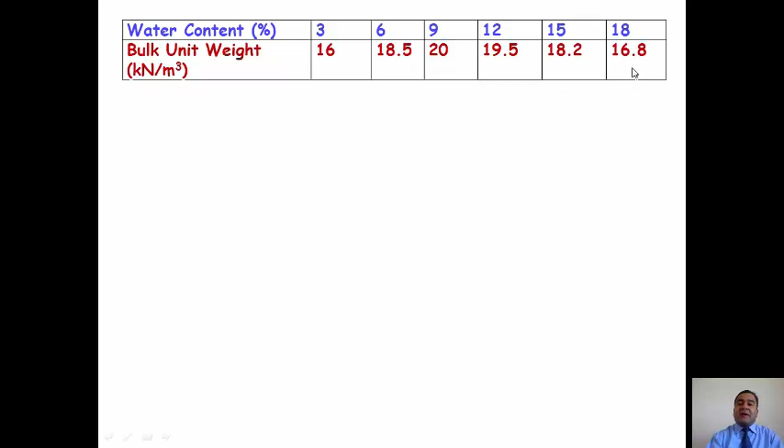Another example: you have moisture content 3, 6, 9, 12, 15, and 18%, and the corresponding bulk unit weights are 16, 18.5, 20, 19.5, 18.2, 16.8 kilonewton per meter cube. What I forgot here is your 95% relative compaction required in the field will be 18.22 multiplied by 0.95.

In your question you have to find dry unit weight and water content at 95% standard compaction, right? So calculate whatever amount you got and multiply that with 0.95. You can also calculate degree of saturation at maximum dry density.

Gamma D is equal to G sub S gamma W over 1 plus E. So gamma D is known now at maximum dry density, G sub S is 2.7, gamma W is 9.81, over 1 plus E, that is void ratio. Now you got the void ratio from there.

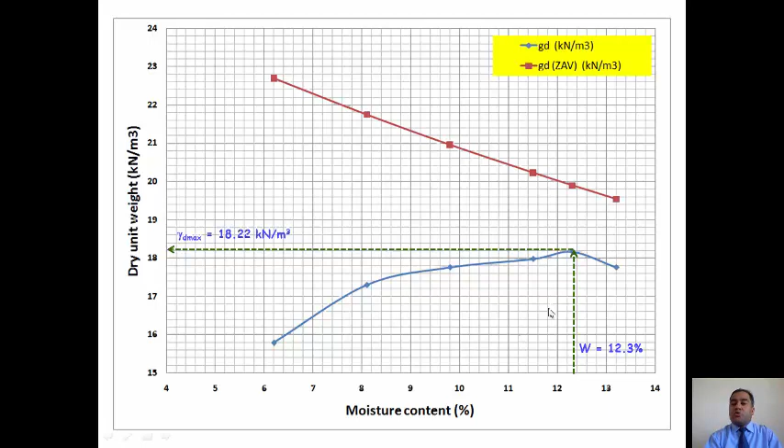So that was the question. Okay, let's do another example: maximum dry unit weight and optimum moisture content of the soil. Please calculate that, this specific gravity is 2.7. And zone of compliance, there's an error here, if the acceptance relative compaction in the field is 95%. So field unit weight should be at least 95% of the maximum dry density you got from the lab, and the field moisture content should be within plus or minus 2% of the optimum moisture content.

Okay, let's see this example. This is exactly the same. You see 16 over 1 plus 3 over 100 will give me 15.53, right? And whatever equation I showed you for the zero air void line, if you substitute this moisture content and a specific gravity of 2.7, you can get 24.48. So this is pretty simple to calculate.

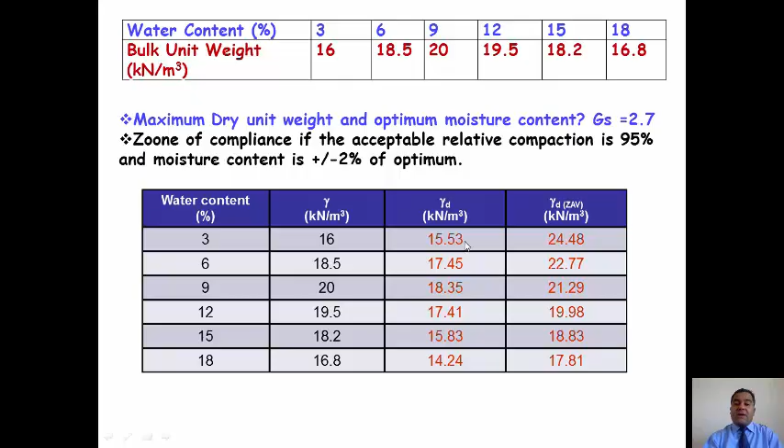After you get that, we plot moisture content on the x-axis and dry unit weight on the y-axis. So if you plot all of them, you get this type of bell-shaped curve, and the maximum dry density here is 18.35 kilonewton per meter cube, and the optimum moisture content in this example is 9%.

Now the question is, in the field, anything that gives you dry unit weight more than 95% of 18.35 is acceptable. So 95% of 18.35 is 17.43 kilonewton per meter cube. So make a line from 17.43, a horizontal line, and anything above that in the field is acceptable. If the field unit weight is less than that, not acceptable.

Then the other condition is, if the field moisture content is within plus or minus 2% of the lab optimum moisture content. So optimum moisture content is 9%, so 9% minus 2% is 7%, 9% plus 2% is 11%. So if the field moisture content is more than 7% and less than 11%, that is acceptable.

Okay, so we need to control that also. You cannot put a lot of water, you cannot put less water, all those things. So these are the conditions you have.

So the dry unit weight should be more than 17.43. Anything above this horizontal line is acceptable. And anything in between 7% and 11% moisture content is acceptable. So this hash zone is the zone of compliance.

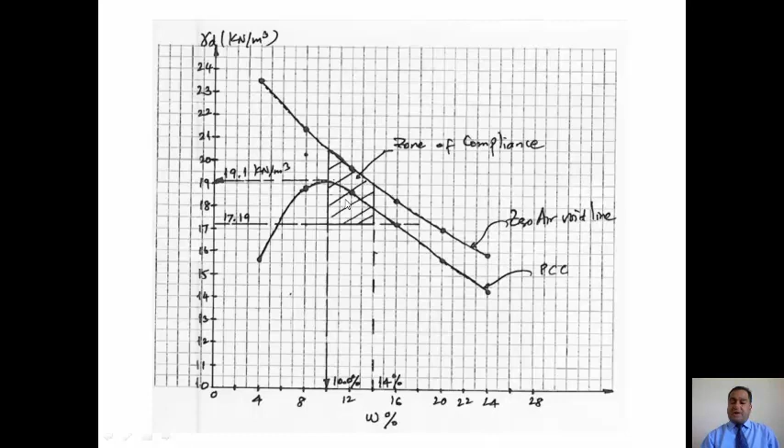In the PE exam or in our exam here, or in any calculation, you may be given the field bulk unit weight and field moisture content. From the field bulk unit weight you can calculate the field dry density, dry unit weight, and plot the field dry unit weight and field moisture content to see whether it lies within the zone of compliance or not.

So we did that: gamma D max and optimum moisture content. The field gamma D should be more than 0.9 times 19.1, that is 17.19, and field moisture content should be 10 to 14%.

The behavior of a fine grained soil under compaction depends on different situations. Let's see that. This is the exact same curve I showed you before, schematically. If you increase the molding moisture content, the compaction density or unit weight increases up to point B, where you have maximum dry unit weight, and the corresponding moisture content is the optimum moisture content.

When you look at the soil fabric, at point A it is randomly oriented. At point B, which is maximum dry density for lower compaction effort, the soil is still randomly oriented but a little better than at point A. At point C, the soil starts to have parallel orientation—the plates are moving toward parallel orientation, but it's still a little random.

Now let's increase the compaction effort, the compaction energy. As I told you, higher compaction energy increases the maximum dry density and lowers the optimum moisture content. Now, with more energy, the particles are closer to each other but still randomly oriented. But at the moisture content equal to the moisture content from the lower energy case, higher energy will convert all those randomly oriented particles into basically parallel orientation.

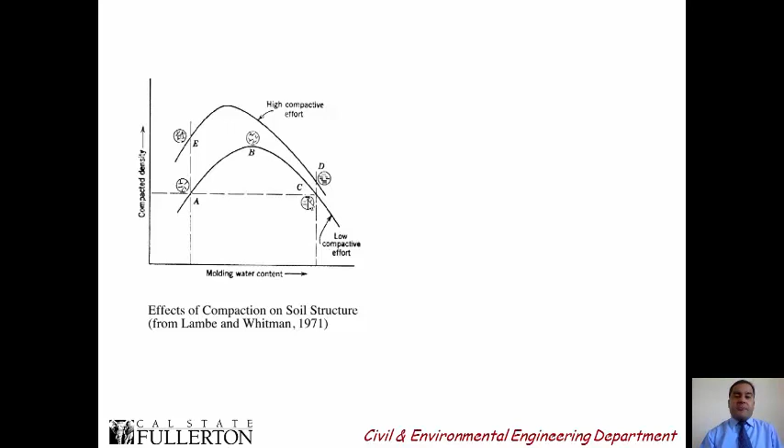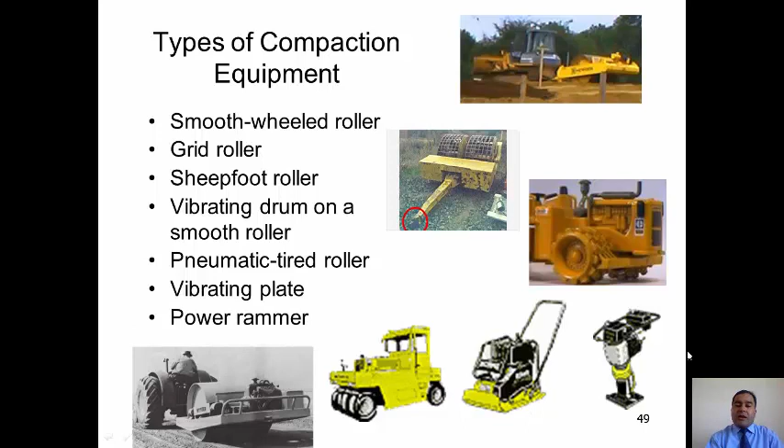And we also use a pneumatic tire roller, where it rolls with pneumatic tire pressure—these are simply like tires. And if the area is small, we can also use vibratory plate compaction, or a power rammer. If you want to see a power rammer, we have that in the lab.

So this is a smooth wheel roller, and this one is a pad foot roller, where you have projections a little smaller compared to the sheep foot roller. And this is the sheep foot roller, the projection is much more than the pad foot roller, but it's still smaller than the other one I'll show you in a while.

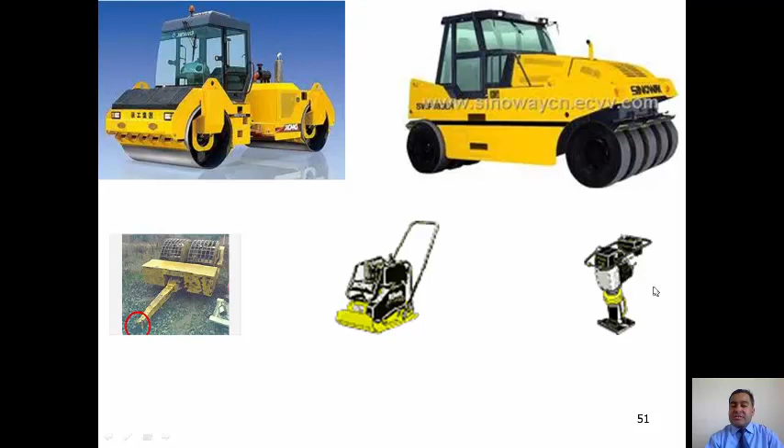And this is a rubber tire roller. We roll the soil, put weight on top of it, and roll it with rubber tire pressure. So this is a smooth wheel roller, this is a rubber tire roller, this is a grid roller, this is the tamping roller, and this is also a tamper, which we talked about. It's a vibratory plate, and this is the tamper we use in the lab, also called a power rammer.

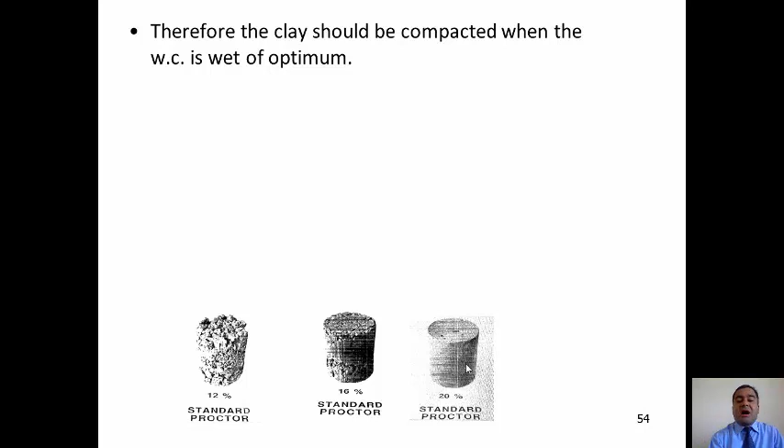So moisture content plays a huge role in reducing soil clods and the random orientation of soil particles. If the soil is on the dry side of optimum, the uncompacted soil contains dry and hard clods that are not easily broken during compaction.

That will create huge pores, which will increase the hydraulic conductivity. The only way to get rid of that is to compact with a higher amount of energy. That higher energy brings the soil closer to the optimum moisture content situation for that particular energy, and is good enough to break the clods.

If excess water is permitted in the soil, pore pressures develop because the pore space is filled with a lot of water. When we apply energy, that pore pressure will repel the energy back, which is not good. While the soil mass is trying to shift from one location to the other, the pore water pressure will block that and prevent the soil particles from moving, which works against the increase in density of the soil.

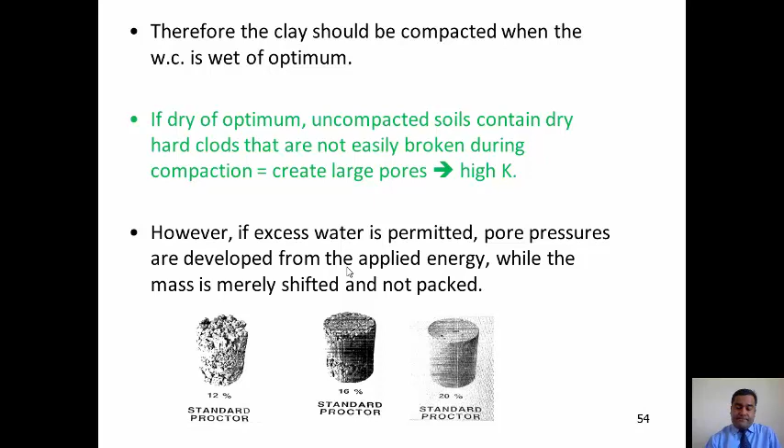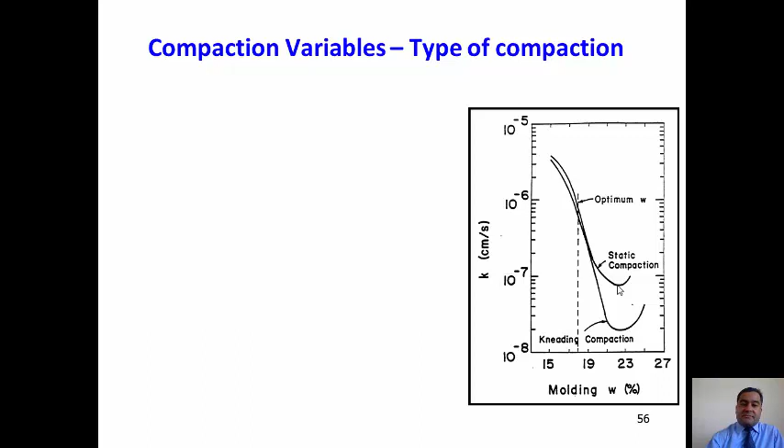Okay, so if it is the wet side of the optimum, then if you are, let's say, about 3 or 4% more than the wet side of the optimum, so 15, 17, 19, so 18% optimum. So if you do 5%, 4% more than the optimum, let's say 22% moisture content, the kneading gave much lower hydraulic conductivity than the static compaction. You could see that. So the hydraulic conductivity corresponding to the compaction effort depends on the type of compaction.

So in static compaction, the soil is packed in a mold in a squeezed way with a piston to compress uniformly statically. So the void ratio at the top and bottom may be different, or at the center may be different. But in kneading, a probe or the pie-shaped metal piece that is attached to the drum of the smooth wood roller is projected.

That way, if you are pressurizing, if this is a sheep foot at the base of the drum, then you are getting pressure let's say 6 inches below, and you are also getting pressure 6 inches above, or at the place on the surface. So you can get the same pressure at the surface and 6 inches below. That way you get uniform pressure. So that way we push them, the metal plate will help.

So the best type of field compaction equipment is always a drum roller with what we call sheep foot roller. So drum roller with rods projected, as I told you, at the feet, sticking out from the drum, and then those rods penetrate into the soil and destroy the clod. At the same time, they also try to make uniform pressure throughout.

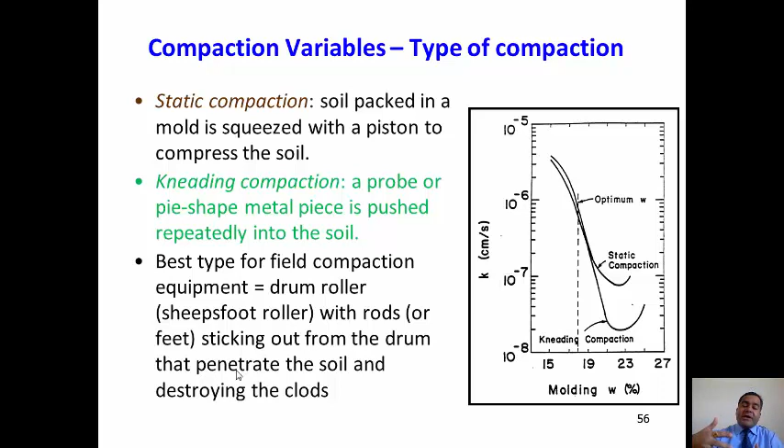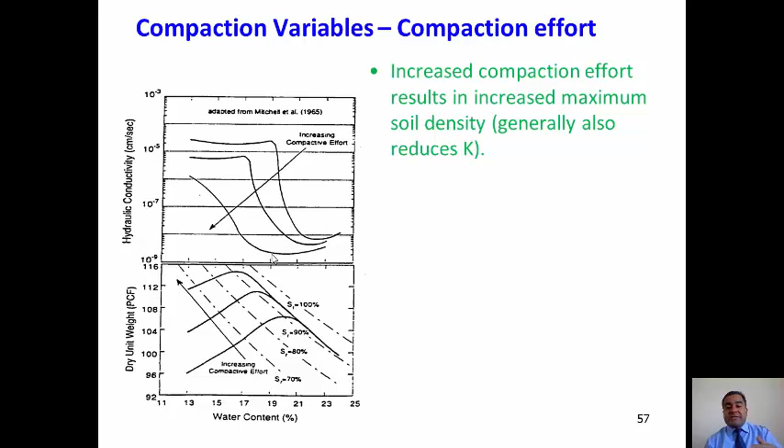So higher energy is always good, but the thing is, it's more expensive. Increased compaction effort results in increased maximum soil density, which we've discussed, and that will generally reduce the hydraulic conductivity.

However, that difference is strongly affected by moisture content, because the difference is much higher here compared to there. At higher moisture content, the difference is not that big. You can see all three compaction efforts at higher moisture content give you almost the same hydraulic conductivity.

Two samples with the same moisture content and similar density can have vastly different hydraulic conductivity when compacted with different energies. For example, at the same density, say 108, the moisture content corresponding to that is about 15%. Here, the hydraulic conductivity from three different compaction efforts are totally different.

So extra compaction energy may not make a huge density difference, but it helps break the clods, reducing void space and reducing hydraulic conductivity. In compacted clay liners, we are more concerned with hydraulic conductivity as opposed to density, strength, and those other properties.

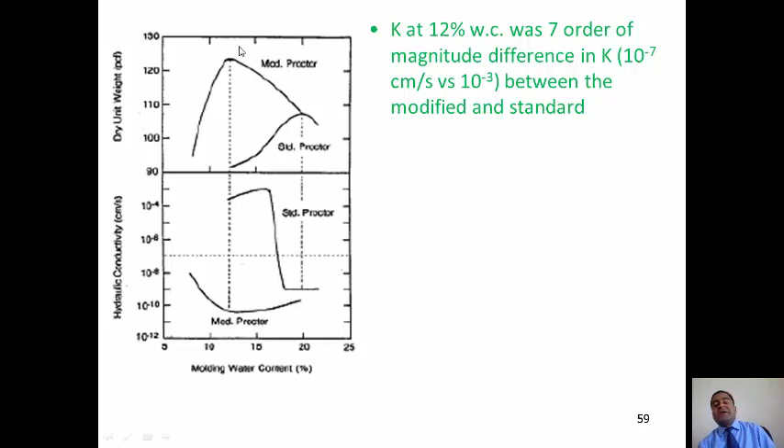lower in the modified Proctor compaction effort, higher energy compared to the energy that we use for the standard Proctor compaction effort. Okay, so let's go to the 20% moisture content.

At 20% moisture content, the density and the water content are almost same, because no matter whether it is the modified or standard, both give you almost the same density. But the hydraulic conductivity from the modified is still about, let's say, 1 magnitude in log scale or slightly less than that, but it's still lower than the hydraulic conductivity we got from the standard Proctor test.

Okay, so it is always suggested that the standard Proctor test should be used in the lab to be more conservative, because in the lab you are using standard Proctor, that way you are getting higher hydraulic conductivity compared to the modified one. That way if you're getting higher, you tell that no, it is not in the field. Actually, if you're using higher compaction effort, you may end up getting lower hydraulic conductivity. That way you are on the conservative side. So always we want to have a larger number in the lab than in the field. That way you are on the conservative side.

So applied compaction effort is generally expressed in terms of foot-pound per cubic foot, as I showed you in the diagram before. For example, the Department of Navy specifies 4 to 6 passes of sheep foot roller with foot contact pressure of 250 to 500 pounds per square inch for plasticity index more than 30, and 200 to 400 pounds per square inch compaction pressure for soil with plasticity index less than 30.

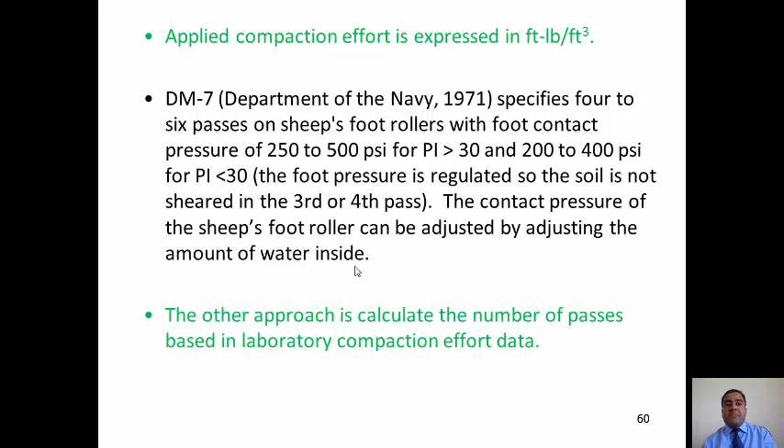Both approaches... mostly the other approach is to calculate the number of passes based on laboratory compaction effort data. So the energy we are putting in the laboratory compaction to give me the hydraulic conductivity of 10 to the power negative 7 centimeter per second or lower, we compare that with the energy we are passing from one pass of the sheep foot roller, whatever energy I'm getting, and then I divide the total energy I'm putting in the lab to get that required hydraulic conductivity by the energy for one pass to get the number of passes I need for the rolling.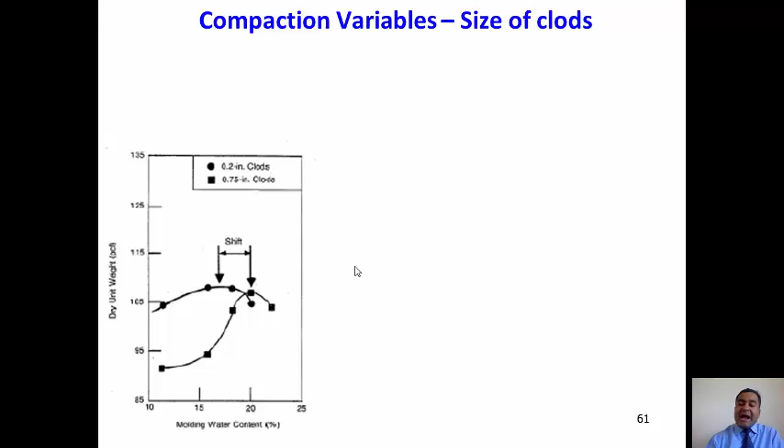Okay, so now let's go to the compaction. The other thing that makes a difference in the hydraulic conductivity is the size of the clods that we talked about before. In most lab Proctor compaction tests, what we do is first we oven dry the sample, we crush them, we pulverize them to pass through number 4 sieve, and then we moisten that by adding certain moisture content as we talked before, and then with that moisture content we compact the soil.

So large size particle is 0.75 inch, while in the lab the largest size particle you have is 0.2 inches. In the field you may have larger, let's say 0.75 inch size particle, so that way you get a clod of the particle. If you have small size, then when you add moisture content and compact that, you'll get uniform increase in density with the moisture content.

So maximum dry density you're getting is somewhere here, about 107 or 108 pound per cubic foot. When you have the soil sample in the field that has a larger clod size, close to 0.75 inches, by increasing amount of water and compacting that, you may end up getting the same maximum dry density, but the optimum moisture content shifts significantly by 2 or 3%.

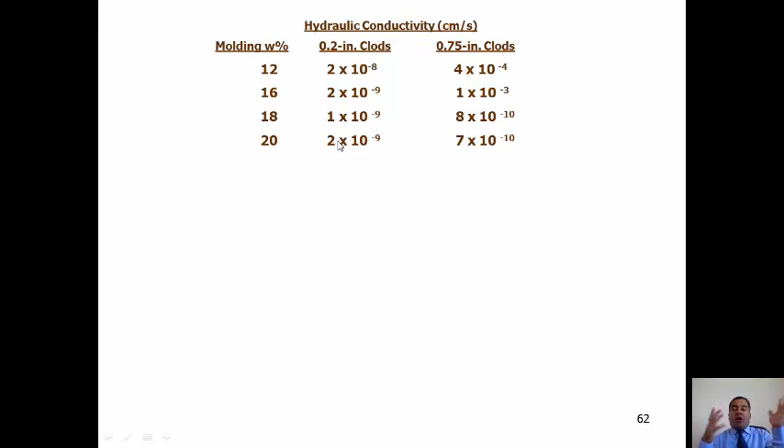So all those parametric studies should be done. At moisture content 12% and 16%, the larger size particle soil gave 4 to 6 orders of magnitude higher hydraulic conductivity, while at 18% and 20%, the larger size gave lower than the smaller one.

So it's always important to figure out what will be the expected clod size in the field, for dry, hard soil. It's extremely important for high plasticity, dry, hard soil compared to low plasticity, soft soil, because when we apply energy and water, we may break the clods.

So it's always recommended to start compaction with smaller clods, like about 1 inch. Mostly in the field, tillers and discs may be used for breaking the clays in the field. In the lab, we may use a high-speed pulver-mixer to break them, reducing the clod size from bigger to smaller, and then run the test in the lab.

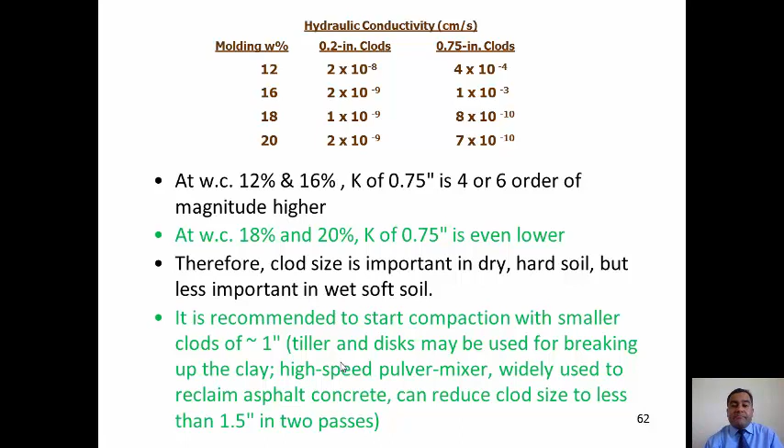The other thing we need to consider is the compaction effort. During compaction, we need to consider the bonding between the lifts. Let's say you have 2 layers of soil, one with a small projection, the other with a big projection. When you have a lift, the smaller projection will knead up to this point, and below that we are not kneading.

If the projection is pretty high, then when you add a new layer, all those soils were almost equally pressurized. When you add a new layer, you make sure the entire soil has almost the same pressure. Here there's a gap between the properties at the base of the projection and the base of the previous compacted layer, so that's one important thing.

The other thing is when we make a compaction, we do it in lifts, typically 6 to 9 inch lifts, and we have to make sure the compaction effort is uniform. In the horizontal direction, when you have compaction up to a point and you're starting compaction from there, we need to scarify, make them rough. That way the bonding is pretty good between the horizontal joint.

Same time for the vertical joint, and the horizontal joint. You finish one layer here, then you add one more layer. We have to make sure we are scarifying them, making them rough. That way there's a good bond between the bottom layer and the layer above. We have to be very careful.

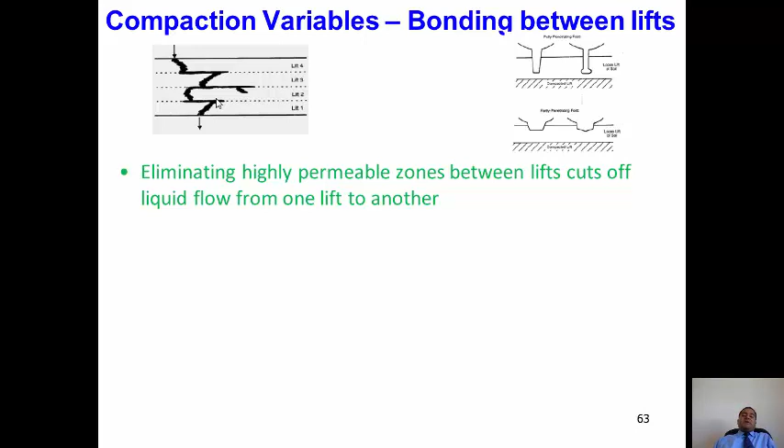Eliminating highly permeable zones between the lifts cuts off liquid flow from one lift to the other. That high permeability zone could be mainly because of poor compaction or poor bonding. So it's always useful to use sheep-foot rollers - they are the best kind to reduce the hydraulic connection between the defects, giving better bonding.

For example, the fully penetrating type sheep-foot roller has a shaft 9 inches tall, longer than the thickness of the lift between the compaction. Typically compaction lift ranges from 6 to 9 inches, so that way the shaft can even penetrate to the layer below the previously compacted layer.

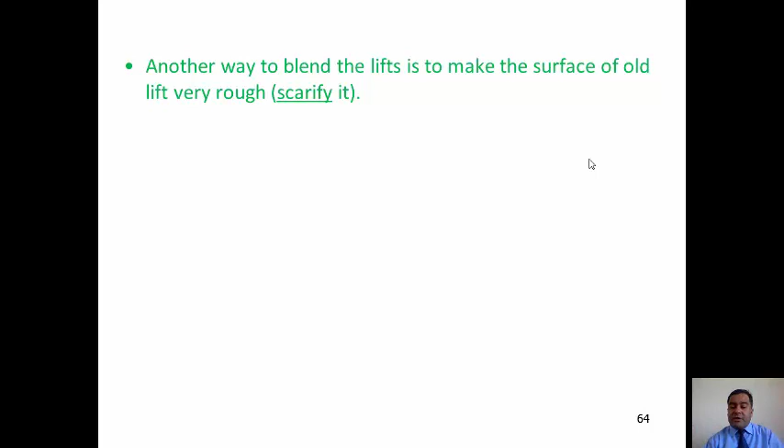Mostly partially penetrating, or in other words low projection foot rollers, we call them pad foot rollers. They cannot penetrate to the old layer, so that may create zones of heterogeneous permeability - it's not good. Another way to blend the lifts is by scarifying the layers roughly, so they have very good bonding between the previously laid and compacted layer and the freshly compacted layer. We talked about that.

Commonly in construction of the soil liner, the finished lift is sealed with a smooth steel drum roller to minimize desiccation erosion. So after compacting, we put a layer of soil and seal them - that will control erosion, plus control desiccation, evaporation, and desiccation cracking.

The soil must be broken up with a disc before a new lift is placed on it, because you may end up having desiccation cracking there. Sometimes people use plastic to cover them to reduce desiccation cracking, but before we put the new layer, it's always good to break it up first and then place the new layer.

The other thing to think about is, sometimes for below ground disposal pits, there are two different pits. Even in Southern California you can see two different types of pits - one is above ground, where you're dumping the soil above the ground. But most of the time we go with below ground pits, making excavation and putting our clay liner much below the horizontal ground level.

It may need construction of a liner. These are liners - you may end up constructing these liners mostly in a slope. Depending on the situation, sometimes we replace them with a compacted geosynthetic clay liner or composite liners, but most of the time we need compacted clay liners even in the side slopes.

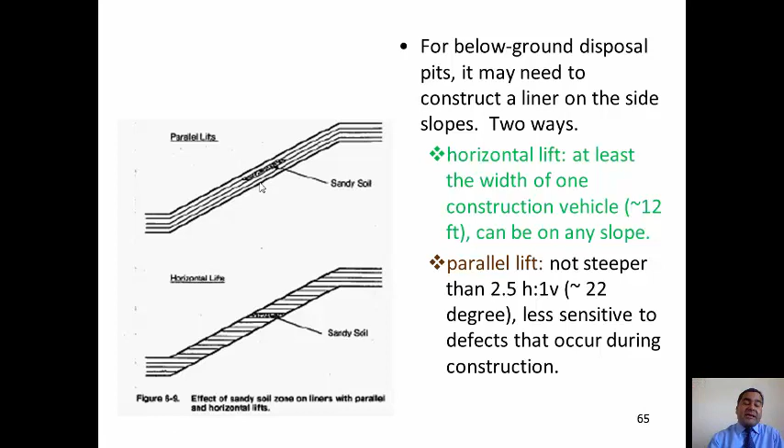In the parallel lift, we cannot make the slope more than 2.5 horizontal to 1 vertical, because if you make it steeper, then you have slope stability problems. Soil may fall from there. You may not be able to even retain the soil in place, retain the previously compacted layer in place.

As we talked about the desiccation cracking, desiccation cracking will create a huge highly permeable zone. We have to reduce that. There are different ways to reduce that.

A dry environment or freezing of the liner can cause the liner to lose moisture. Freezing causes loss of moisture because the water converts into ice. Drying causes loss of moisture because it evaporates the water out.

The potential of soil liner desiccation increases if the capillary break exists between the liner. That capillary break means there is no continuous movement of the capillary water. If you have capillary water coming up, that will moisten the soil and reduce the desiccation cracking. But if there is a break in the capillary water, then the soil keeps on drying with the increase in temperature, and that will cause desiccation cracking. So we have to be very careful about that.

So when the compacted clay liner freezes, the hydraulic conductivity increases after the liner thaws. We talked about that before.

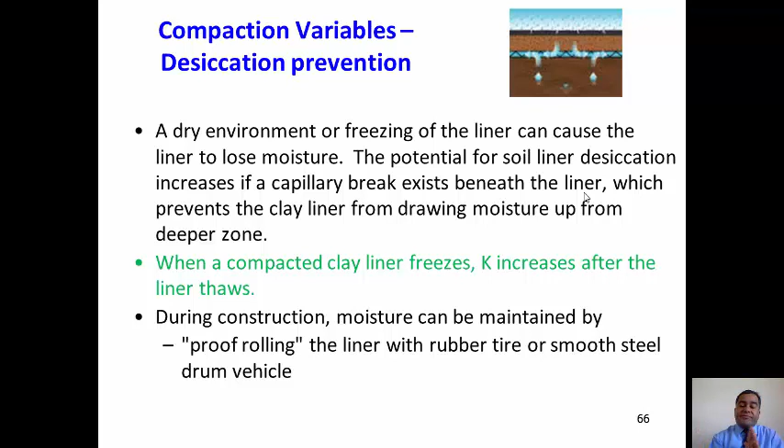During the construction, moisture can be maintained in different ways. One is by proof rolling, as we talked. We simply put the soil and roll it using the rubber tire roller or a smooth wheel roller, because you don't want to scarify them. Just simply smooth wheel roller, roll them. That way you are putting a layer of soil that protects the lower compacted layer of soil.

Then the next day when we come, we simply scarify that soil, or powder it, or pulverize it in different ways, and recompact it. The other way is to cover it with the geomembrane or plastic sheets.

Compaction equipment also plays an important role in the hydraulic conductivity of the compacted clay liner. For example, heavy rollers are over 50 kips capacity and have a long penetrating feet that give a pressure of about 3 to 5 kips per foot along the drum surface, because they are projected. So at the drum surface, the pressure is about 3 to 5 kips per linear foot.

Medium weight rollers range from about 30 to 50 kips capacity. Light weight rollers are 15 to 30 kips capacity, giving only about half a kip per foot of pressure. Because they give less pressure, the bonding is different, the void ratio is different, and the compaction density will be different. For that reason, we have to make sure which roller will be used in the field, and how many passes we have to apply.

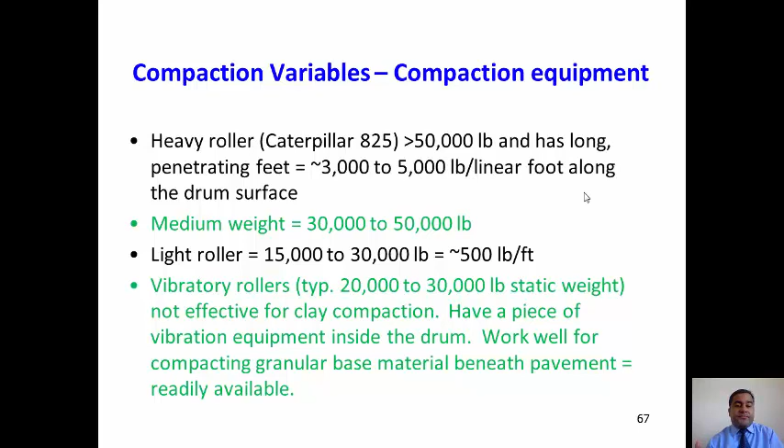The reason vibrator rollers are not good is mainly because the projection is very short, and because they have short projection, the kneading action is not effective. That way you have a separation between two layers, and heterogeneous hydraulic conductivity results. Also, half of its static weight goes to the rear axle and the rubber tire, not to the roller itself.

Sheepsfoot rollers are better because they have a longer projection, as I mentioned a few times, and they provide the same pressure at top and bottom. At the same time, they have high compaction stress at the tip, ranging from 200 to 700 pounds per square inch. Inside the drum, you can fill it with water to increase the pressure, as we talked about.

Mostly in the field, when you drive around, you see a lot of smooth wheel rollers as opposed to the sheepsfoot roller, because smooth wheel rollers are good for different purposes, so people use them more.

So they produce very few sheep foot rollers. They are good for liners, but may not be good for other types of soil or compaction, like compaction in highways or something like that.

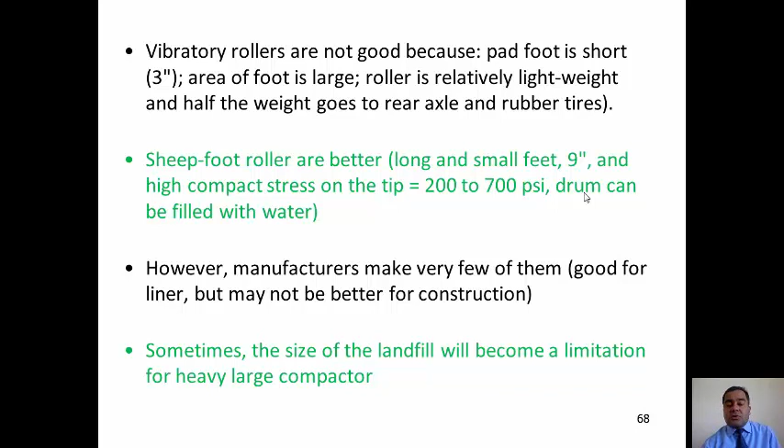Sometimes the size of the landfill becomes a limitation for heavy, large compactors, because if your landfill cell is small, or if the access road is a problem, then we may end up going with a smaller one.

Okay, so the recommended design procedure comes with different factors: the shear strength, the permeability of the soil, and other parameters like desiccation, cracking, all those things, right?

One example: let's say to get the hydraulic conductivity lower than 10 to -7 centimeter per second for that particular soil, with standard compaction effort, the moisture content should be between +1 to +5% of the optimum moisture content. If that moisture content gave hydraulic conductivity less than 10 to -7, then the density needed is more than, let's say, 90% of the maximum dry density. Then I can make a zone of compliance that tells, okay, this is the acceptable zone. We talked about that in the past.

The traditional method for specifying the acceptable water content and dry unit weight of compacted clay liners was decided based on different factors. In the past, that was mainly 90% relative compaction and moisture content ranging from optimum to 4% above optimum.

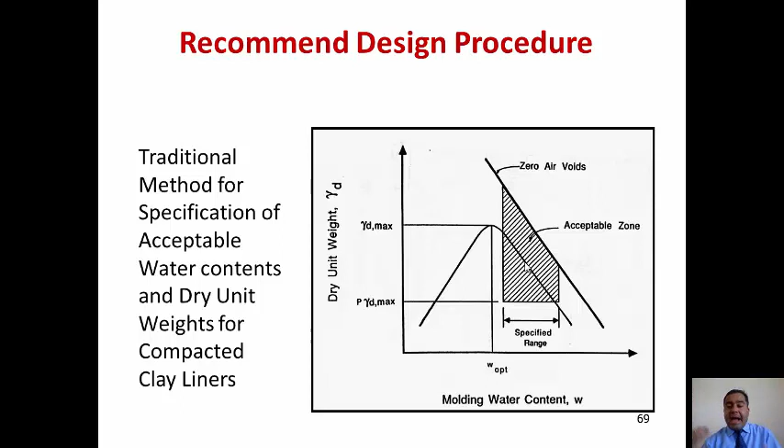If you plot the previous figure, our specification says the dry density in the field should be more than, let's say, 90% of the maximum dry density, and the moisture content should be between optimum moisture content and optimum plus 4%, so that is, let's say, 14% to 18%.

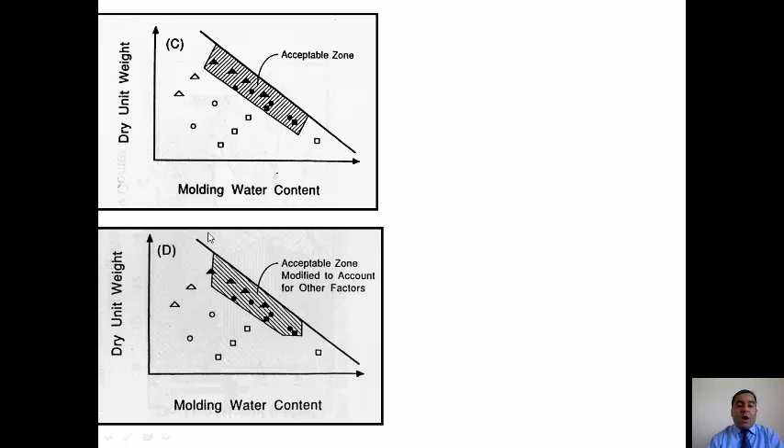For example, if I don't want the molding moisture content less than a certain moisture content, because if the moisture content isn't ranging from this percent to this percent, then it will be in trouble. For that reason, now we say the moisture content should range from this moisture content to this moisture content, and the dry density ranging from a certain percentage of the maximum dry density for that compaction effort. So we have different criteria, and then the third thing we have to consider is how we came up with all this chart here.

Now the other thing we have to consider is based on the shear strength. Sometimes if the landfill site gives you huge pressure on the compacted clay liner, there's a possibility that your liner will fail in bearing capacity failure, and there the shear strength should also be something. So what we do is find the minimum shear strength of the soil that you are getting. We make the relationship between moisture content, dry unit weight, and the shear strength. Unconfined, mostly we check unconfined compressive strength of that soil, and any combination that gives me unconfined compressive strength higher than required, I just hash them. So dry will always give you higher unconfined compressive strength, but may not be good from a permeability point of view.

So then now this area is limited within that dark zone from the strength point of view. This cannot give you high strength because water is too much. Now if you want to add more, from now you've got the strength point of view. You see, this line is based on the hydraulic conductivity, now we have based on the strength.

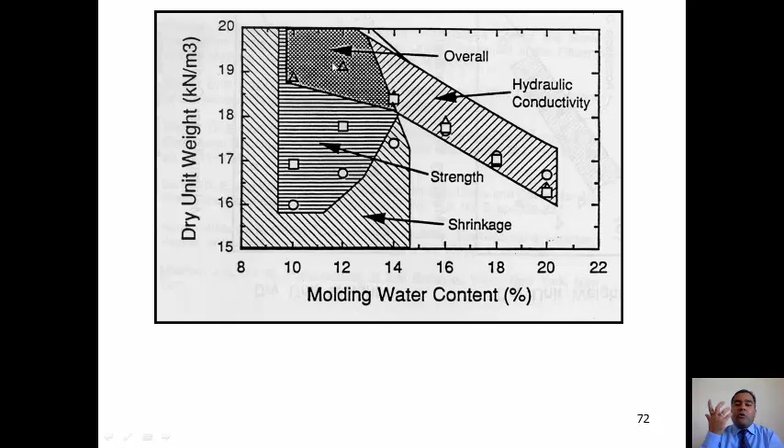So this is the zone of compliance based on the hydraulic conductivity, this is the zone of compliance based on the strength, and this is the zone of compliance based on the shrinkage. If you combine all of them, this tiny space is the actual overall zone of compliance. So use of hydraulic conductivity, shear strength, and shrinkage data to define a single acceptable zone is quite common lately. That is called the overall zone of compliance, and you can get that from lab tests. If you do a parametric study in the lab with different compaction efforts, then you can easily make them.